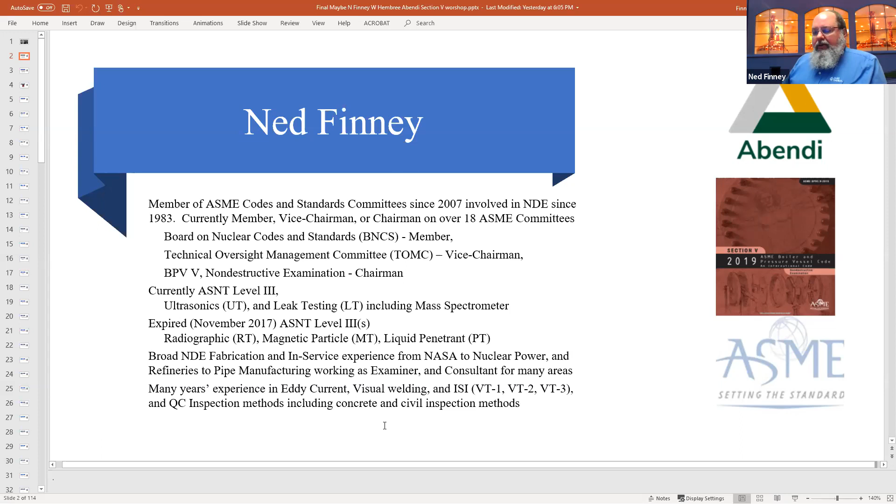Previously certified in eddy current, visual welding, in-service inspection, visual, VT123, and QC inspection methodologies as well. I started my career in concrete, soils, civil testing. And I'll let Wayne go through his resume.

Thank you, Ned. I started out many years ago in 1967, being continuously employed in NDE. I first had a special class put on by the Department of Energy called physical testing, non-destructive and destructive testing at the Union Carbide, at that time Y12 production facility in Oak Ridge, Tennessee. It just happened to be where they had the Manhattan Project. For those people who have read their history, it's where the atomic bomb was manufactured during World War II.

I got out of there, employed by Commercial Test Lab. I spent a little bit of time in the U.S. Army. I was fortunate to parlay my background and work on military aircraft during the Vietnam era. Upon discharge, I worked with a large pipe fabricating outfit in South Carolina for almost a year. Then from there, I went to Combustion Engineering at their nuclear facility in Chattanooga, Tennessee.

I got my first Level 3 by examination then. I took my first ASNT Level 3 in '76 when I transferred to the Construction Services Division of Combustion. And I became the NDE manager for worldwide operations. After 11 years in Connecticut, I got an opportunity to move back to Tennessee, my home state, even though I traveled tremendously, national and international, for Combustion construction services.

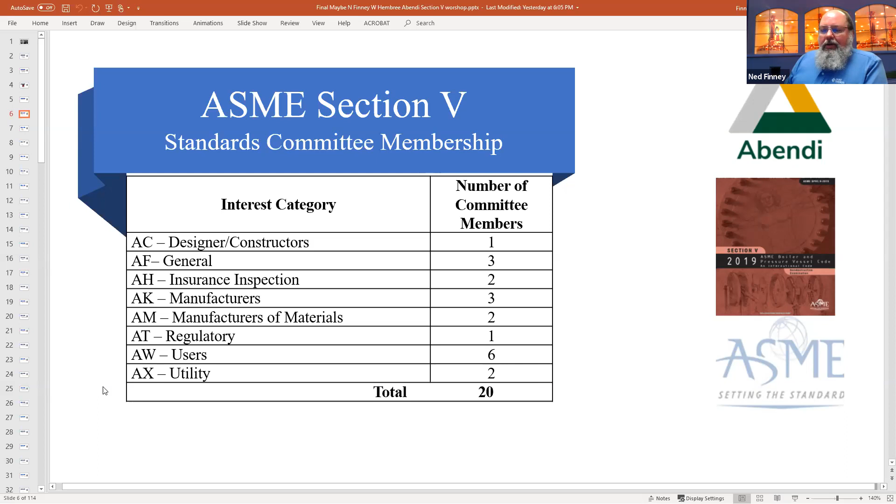And I also note that Wayne and I are also part of that small group of people that have built nuclear power plants, built conventional power plants, been involved in operation of nuclear and conventional power plants, and been involved in other fabrication all the way from building the piping to seeing it installed and having the systems in service. Wayne, if you'd like to talk about the foreword section, I'll turn this over to you. Just tell me when you want to switch through the numbers.

One of the presentations yesterday gave a pretty good history on ASME. It really started in the Industrial Revolution of the entire world, but primarily in the United States. And the first major thing was the sinking of the steamboat, the Sultana, and there's various counts of how many people lost their life. You can do the research on that. The engineers got together in New York City in 1880, and that was really when ASME was started. But the first actual publication was in 1911. The American Society of Mechanical Engineers established the Boiler and Pressure Vessel Committee to formulate the standard rule for construction of steam boilers and other pressure vessels.

Why the steam boilers? Well, at that particular time, there were locomotives. There were steam boilers in factories and schools and just all over the country, and they were not regulated. Matter of fact, from materials and things of that nature, if you had a bolt made in one part of the country, then the nut for that bolt could be made someplace else, and there's no consistency on actual manufacturing. So with that, ASME was formed in 1911.

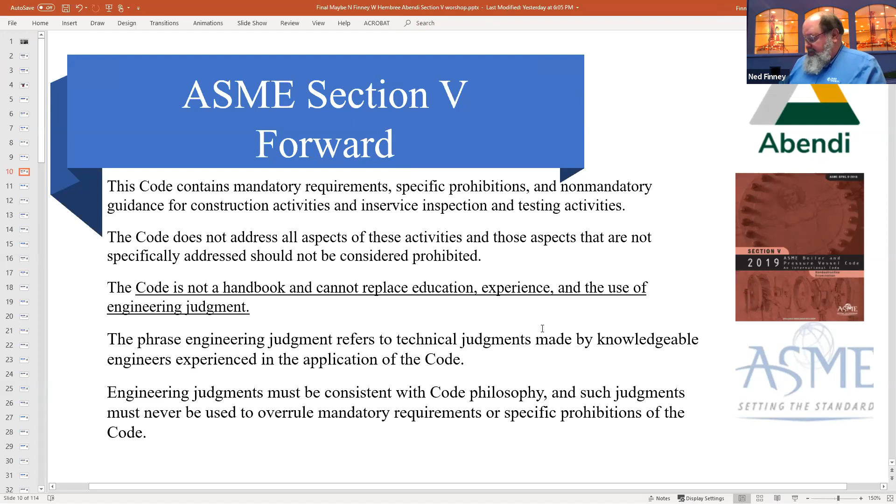Well, if I can get it to advance now, I'll be fine. There we go. Okay, I'll take this. I had one more, didn't realize it.

The committee recognizes that tools and techniques used for design and analysis change as technology progresses, and expects engineers to use good judgment in the application of these tools. The designer is responsible for complying with the code rules and demonstrating compliance with code equations when such equations are mandatory. The code neither requires nor prohibits the use of computers for the design or analysis of components constructed to the requirements of the code. However, designers and engineers using computer programs for design or analysis are cautioned that they are responsible for all technical assumptions inherent in the programs they use and the application of these programs to their design.

Obviously this was added some 15 or 20 years ago, because prior to probably the 1985 to 1988 timeframe, there were not that many computers used in design calculations.

Next slide. I'm there. This is the next slide, Wayne.

The rules established by the committee are not to be interpreted as approving, recommending, or endorsing any proprietary or specific design, or as limiting in any way the manufacturer's freedom to choose any method of design or form of construction that conforms to the code rules. I'll stop here a second. You can see also, I spoke to Section 1, but the same applies for Section 3 and Section 8. There are many weld joint configuration designs listed. The code is not going to tell the certificate holder which one to use. It's up to the certificate holder's design people to determine what's required.

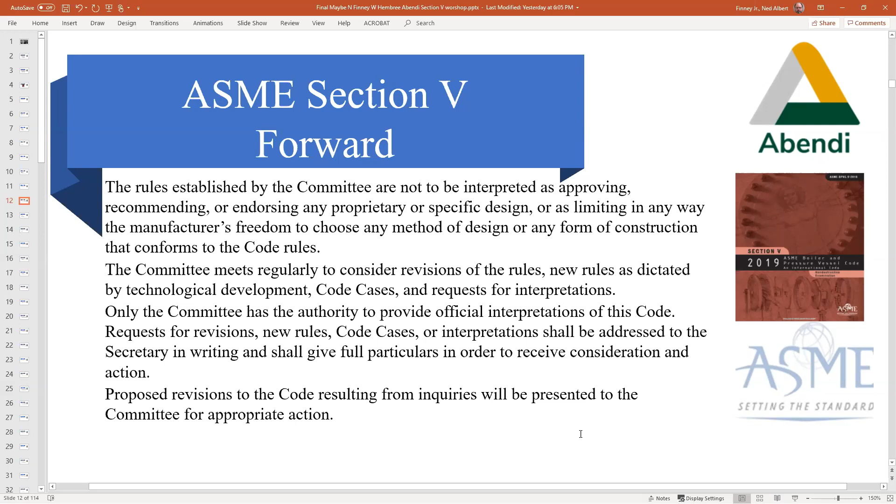I've already read this one. Yeah, I thought, was this the last one we had? Yeah, I'll take over on the next one. Okay, appreciate it. Thank you.

ASME Section 5 is broken up into many different articles, and each article covers different topics. They cover different methodologies for applying non-destructive examination, with separate sections used in different ways. But Article 1 is the general requirements, and general requirements apply to application of NDE across the board. Anything within the book, Article 1 applies to all of it. So there are requirements that apply to radiography, as well as liquid penetrant, as well as acoustic emissions. It covers all of it.

It also goes in and talks about the way that you qualify procedures, personnel, and equipment in order to be able to use it for a given technique within a method. So a method would be radiography, ultrasonics, mag particle, liquid penetrant, leak testing, all of those.

Within radiography, you would have techniques - you have DR, CR, film radiography. Within ultrasonics, you have conventional ultrasonics, time of flight, phased array. Now we've got FMC and other methodologies that we have put in there.

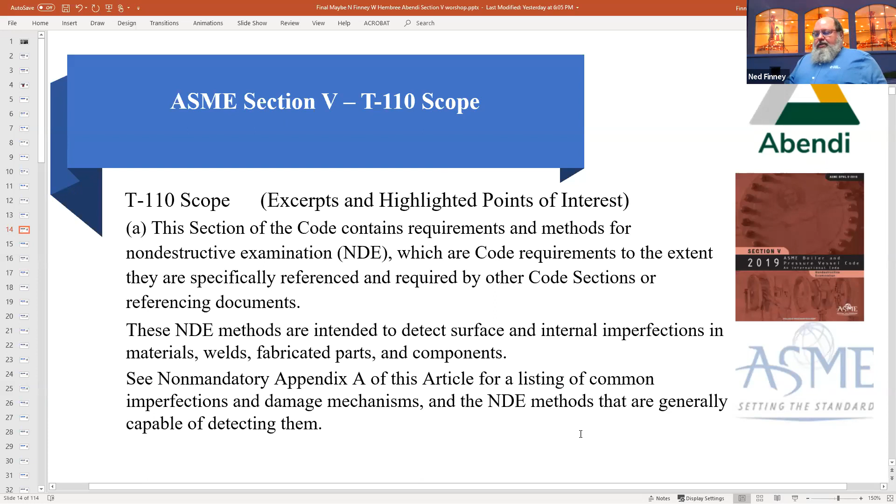So these NDE methods are intended to detect surface and internal imperfections in materials, welds, fabricated parts, and components. Non-mandatory Appendix A is a list of common imperfections and damage mechanisms and the NDE methods that are generally capable of detecting them.

Scope continued. B, general terms. For general terms, refer to mandatory appendix 1. New additions to section 5 may be used beginning with the date of issuance, and they become mandatory 6 months after the date of issuance unless modified by referencing documents.

So what that means is next July, when they publish the 2021 edition, you can start using it. But in January of 22, it becomes a requirement. So don't wait until December of 21 to start looking at the newly published section 5, because the requirements will go into effect unless your referencing documents tell you not to take them into effect.

And in most cases, for section 8 vessels, for most section 1, those sort of things, you will be required to use the new requirements of the published 2021 edition in January of 2022. That's an important change that has been in place for a number of years, but it's not something that people realize until they go, oh my goodness, this is now the rule.

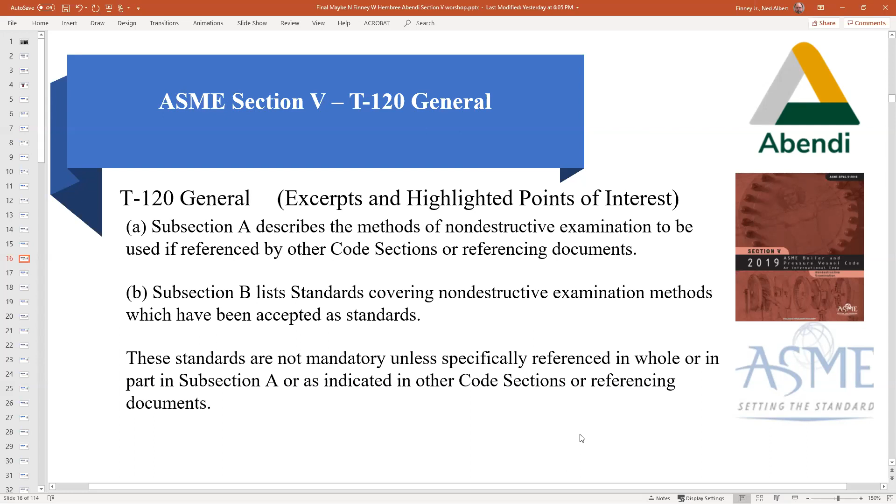Were you going to say something, Wayne? Yeah, I thought you need to go to the next slide. There you go. There we go.

So that was the point I was making on the previous slide. Thank you, Wayne.

Subparagraph E of T120 says, for those documents that directly reference this article for the qualification of NDE personnel, qualification shall be in accordance with the employer's written practice. You must have a written practice for your company, and it shall be in accordance with one of the following documents: SNT-TC-1A,

ASNT CP 189, as amended by mandatory appendix 3 or as amended by mandatory appendix 4. Now,

T120F, which is referenced by several codes, also says that national or international central certification programs, such as the ASNT Central Certification Program or ISO 9712, 2012, and that's important to know that you're compliant with 2012, may be alternatively used to fulfill training, experience, and examination requirements of the documents listed in paragraph E, which is the previous paragraph, TC1A, CP189, as specified in the employer's written practice. You still have to have a written practice, even if you have a central certification program.

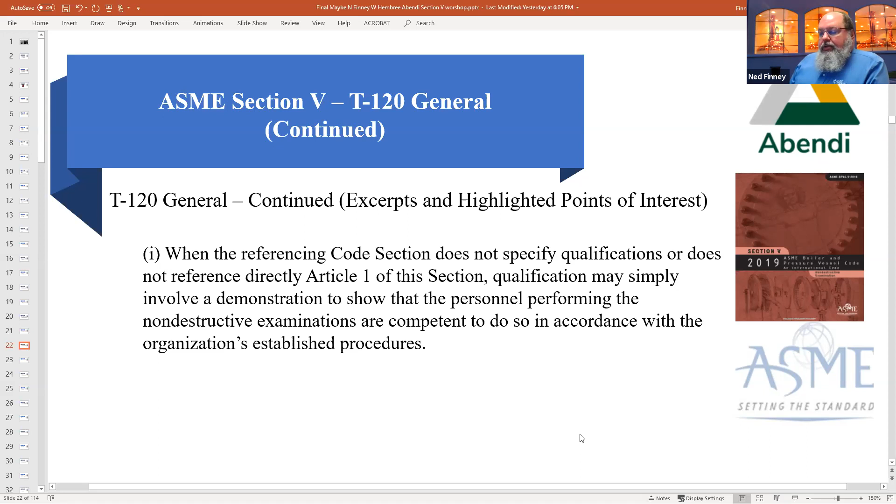When a referencing code section does not specify qualifications or does not reference directly Article 1 of this section, qualifications may simply involve a demonstration to show that personnel performing the non-destructive examination are competent to do so in accordance with the organization's established procedures.

The user of this article is responsible for the qualification and certification of NDE personnel in accordance with the requirements of this article. The organization's quality program shall stipulate how this is to be accomplished. So the company is responsible for the qualification of their NDE personnel. Even if they hire a vendor, the company is still responsible.

I'd like to insert an example. After I retired and started my company, another company hired me to evaluate some radiographic images. They liked my interpretation and knowledge of the code better than the contractor they were using, and wanted me to sign off on acceptance. Unfortunately, I couldn't do that. I had read their written practice, and their written practice indicated that only people who had taken their exam, either full-time or temporary employees, could do so.

Then they realized the shortcoming. The only way I could end up having the final say on the quality of their welds was to take their examination. Which is not a problem—that's not a problem—but it goes to show the reason behind it is that they didn't know if my Level 3 qualification was in the type of work that they were doing or not.

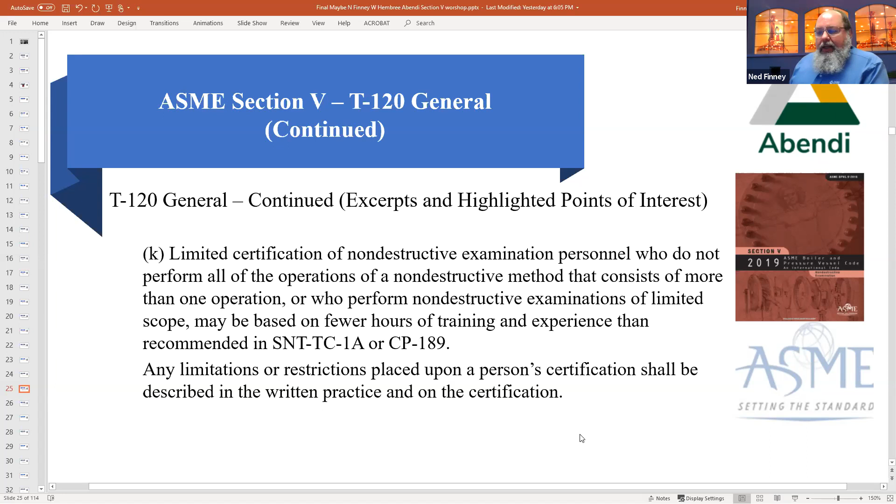T120L is basically saying you can use US customary units or SI metric units for compliance with all these requirements. However, if you use one or the other, you shouldn't mix them, because the conversion between metric and US customary units is not exact—you have to do a lot of work to make them equal. So I work as well in metric as I do in US customary units, but I don't work in both at the same time.

When SI units are selected, US customary values in reference specifications that do not contain SI units shall be converted to SI to at least 3 significant digits—so 0.001 is how far out you need to take your conversion.

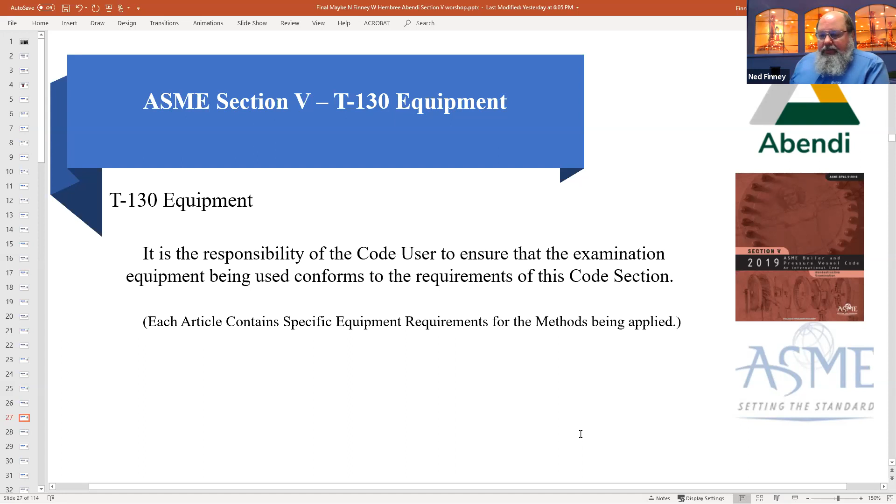That completes T120. There's a lot of information there, and it takes a while to get through it all. T130 is about equipment, and the general requirement is that it's the responsibility of the code user to ensure that examination equipment being used conforms to the requirements of this code section. Each article contains specific equipment requirements for the methods being applied—those last words aren't in the code, but that's what it means.

T150, this is procedure. When required by the referencing code, all non-destructive examination performed under this code section shall be performed following a written procedure. A procedure demonstration shall be performed to the satisfaction of the inspector.

When required by reference code, personnel demonstration may be used to verify ability of the examiner to apply the examination procedure. Examination procedures shall comply with the applicable requirements of this section for the particular examination method. So each of the following articles have requirements of what has to be in the given procedures.

Written procedures shall be made available to the inspector on request, and at least one copy of each procedure shall be readily available to the non-destructive examination personnel for their reference and use. So the inspector gets it on request, but examiners have to have access to one.

Non-destructive examination methods and techniques included in this section are applicable to most geometric configurations and materials encountered in fabrication under normal conditions. So most configurations under normal conditions. However, special configurations or materials require modified methods and techniques.

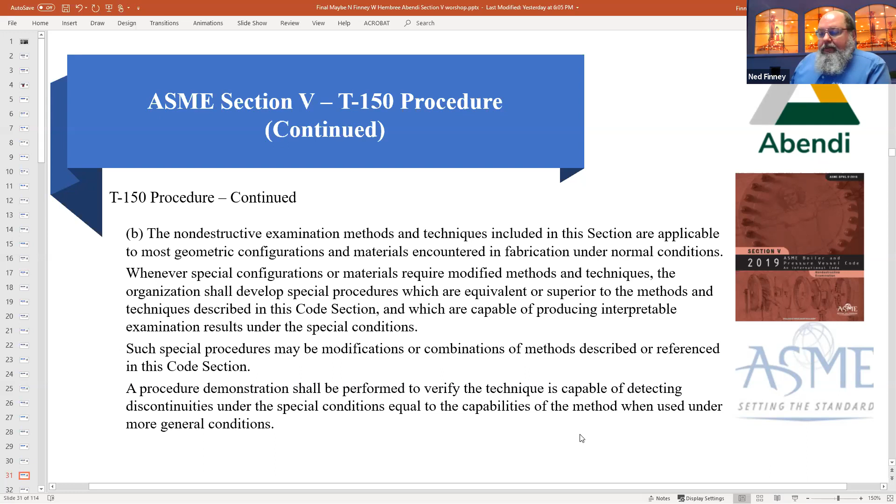Such special procedures may be modifications or combinations of methods described or referenced in this code. A procedure demonstration shall be performed to verify the technique is capable - that may be a repeat of the previous one.

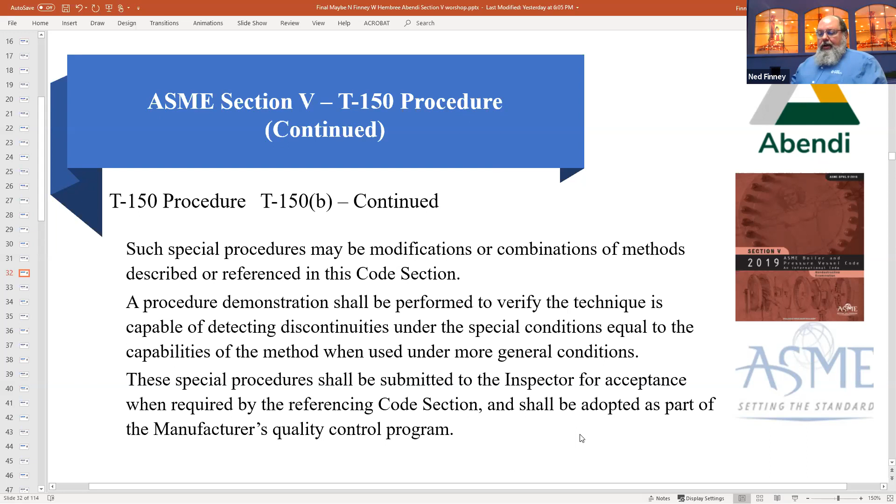These special procedures shall be submitted to the inspector for acceptance when required by the referencing code, and shall be adopted as part of the manufacturer's quality control program.

When a referencing code section requires an examination to be performed in accordance with the requirements of this section, it is the responsibility of the organization to establish non-destructive examination procedures and personnel qualifications and certification procedures conforming to the referenced requirements.

When qualification of a written examination procedure is required by the referencing code section - and you'll notice that a lot of things we say are required by the referencing code section, because Section 5 being a support code, much like Section 2 and Section 9, we are the 'how you do it', and then different codes point to Section 5 depending on their needs.

If I can interject, Ned - an example of this is that for years, the procedure used for radiography, the referencing code accepts the completed radiograph as evidence that the procedure was demonstrated, it was met. That's the end result, and that's the only example within Section 5 where the inspector wants to say, hey, can you achieve the radiographic quality?

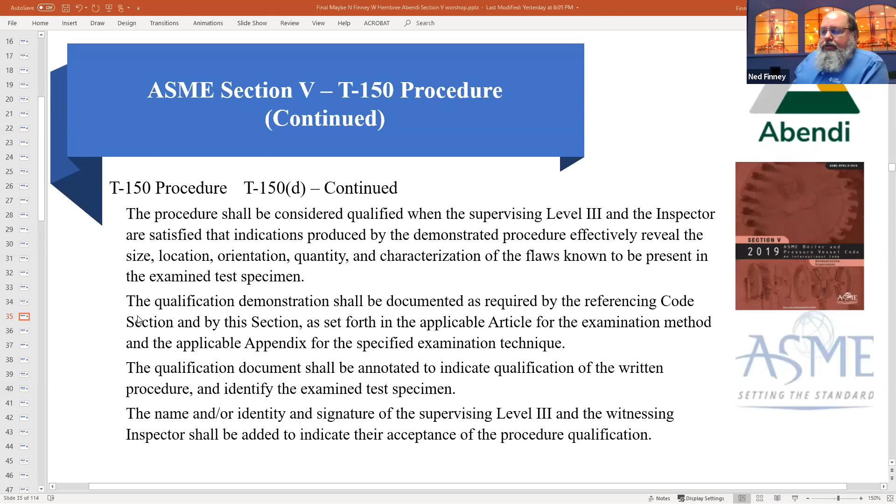Procedure shall be considered qualified when the supervising level 3 and the inspector are satisfied that indications produced by the demonstrated procedure effectively reveal the size, location, orientation, quantity, and characterization of the flaws known to be present in the examined test specimen.

And the qualification demonstration shall be documented as required by the referencing code section and by this section as set forth in the applicable article for the examination method and applicable appendix for the specified examination technique. Qualification documents shall be annotated to indicate qualification of written procedure and identify the examined test specimen.

Name and/or identity and signature of supervising level 3 and the witnessing inspector shall be added to indicate their acceptance of the procedure qualification. That's the end of T150.

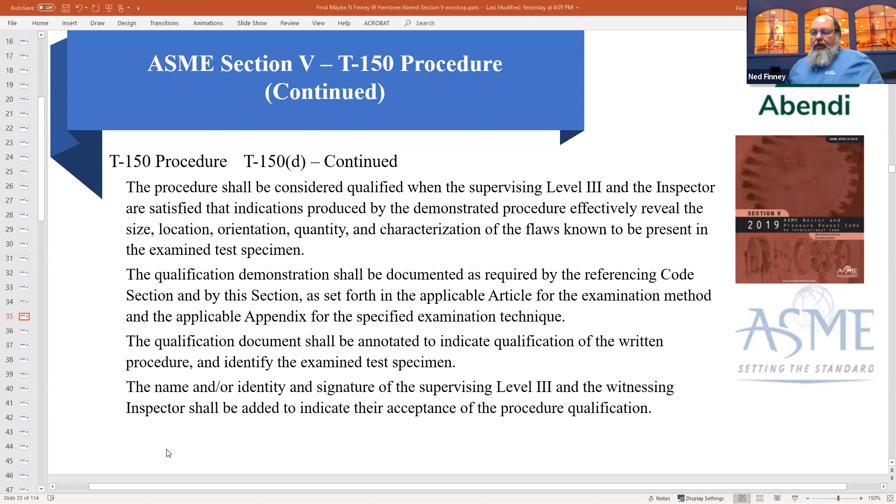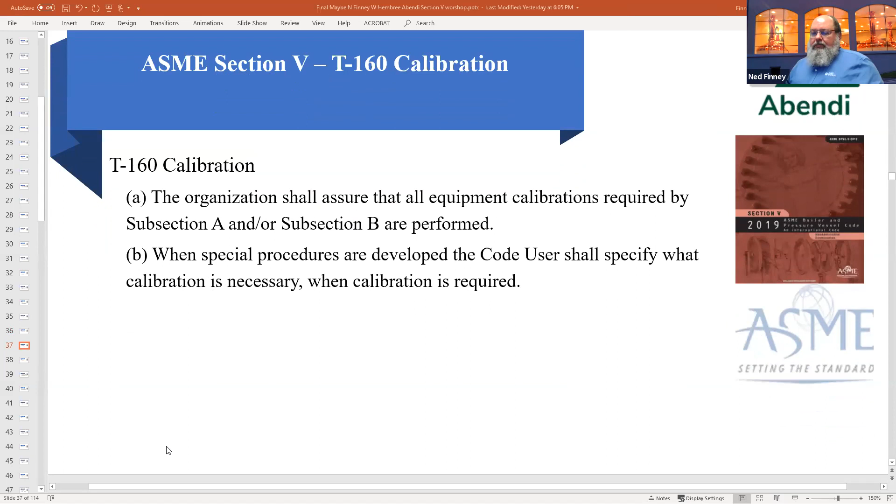After this section, Ned, we ought to take a break. All right. I think I've got the same slide there. So pick back up T170. Yeah. Antonio, 10-minute break. 10 minutes is fine. All right. So we'll be back here at 10:40, people. And you can take the opportunity to write questions to our presenters. And I'm going to get another cup of coffee. Okay. Me too. Indeed. We can resume the presentation. All right.

So T170 is examinations and inspections. The inspector concerned with the fabrication of a vessel or pressure part shall have the duty of verifying to the inspector's satisfaction that all examinations required by the referencing code section have been made to the requirements of this section and the referencing documents. The inspector shall have the right to witness any of these examinations to the extent stated in the referencing documents. Throughout this section of the code, the word inspector shall be as defined and qualified as required by the referencing code section or referencing documents.

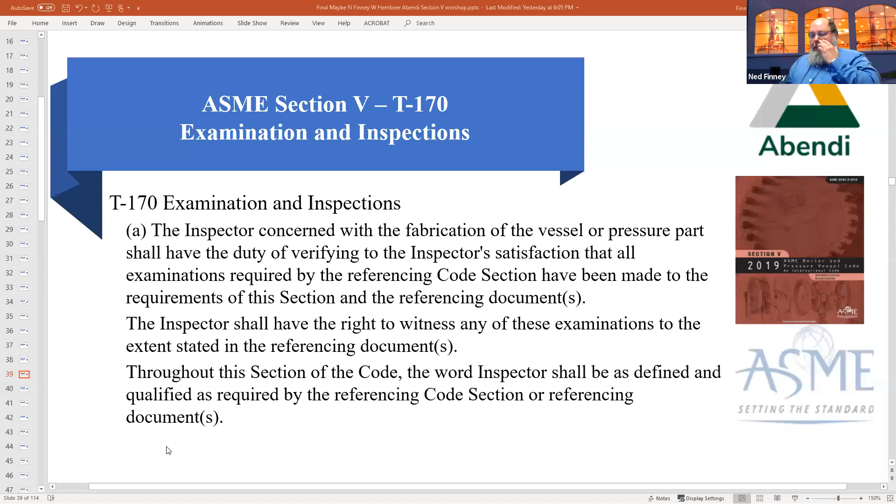And if I can get this thing to work. There. There's a special distinction established in various codes between inspection and examination. And the simple definition that I've always used is inspection is something you watch and examination is something that you perform. Personnel performing them is also adopted in this code. So in other words, the term inspection applies to functions performed by the inspector. The term examination applies to those quality control functions performed by personnel employed by the organization.

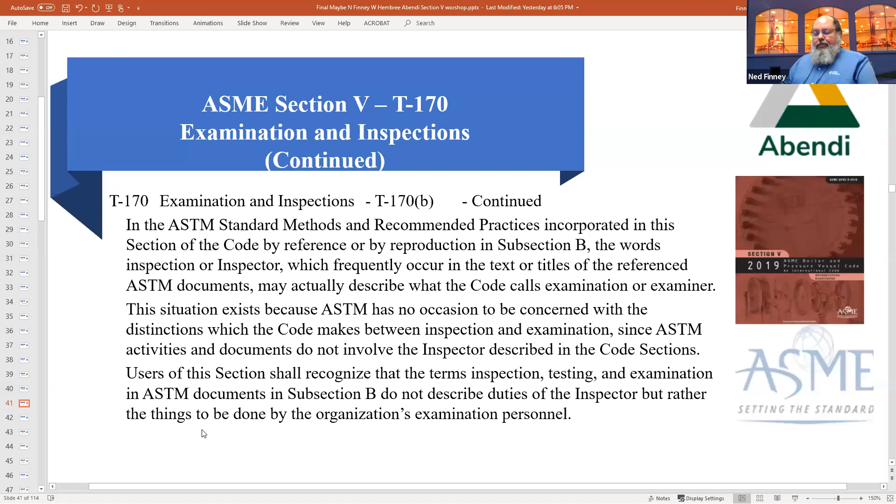One area of occasional deviation in these distinctions exists, and that's in the ASTM standards. The ASTM standards incorporate the word inspection, inspector, and often they're talking about the person who is performing an examination. ASME doesn't modify, for the most part, ASTMs that we publish. They own them. It's their world. So users of this code section shall recognize that the terms inspection, testing, examination in ASTM documents in subsection B do not describe duties of the inspector, but rather things to be done by the organization's examination personnel. Bottom line is the ASTMs use the word inspector to mean examiner in most cases.

If I may add, another way to look at it is the inspector, in many cases in this country, is the authorized inspector. They're the police that make sure that the examiners and the certificate holder follow the code rules. The examiner is one that has responsibility for disposition, accept, reject. The inspector to ASME, the AI or ANII concerning nuclear, authorized nuclear inspector, they do not have that responsibility or authority to accept or reject a weld or component based on quality, if you will. They're only for compliance that the code was met.

So T180 is evaluation. Acceptance criteria for NDE methods in this section shall be as stated in the referencing code section and where provided in the articles of this section. Acceptance criteria in the referencing code shall take precedence. So if we have something that indicates an acceptance criteria in Section V, the referencing code is really the one that applies. These are the acceptance criteria.

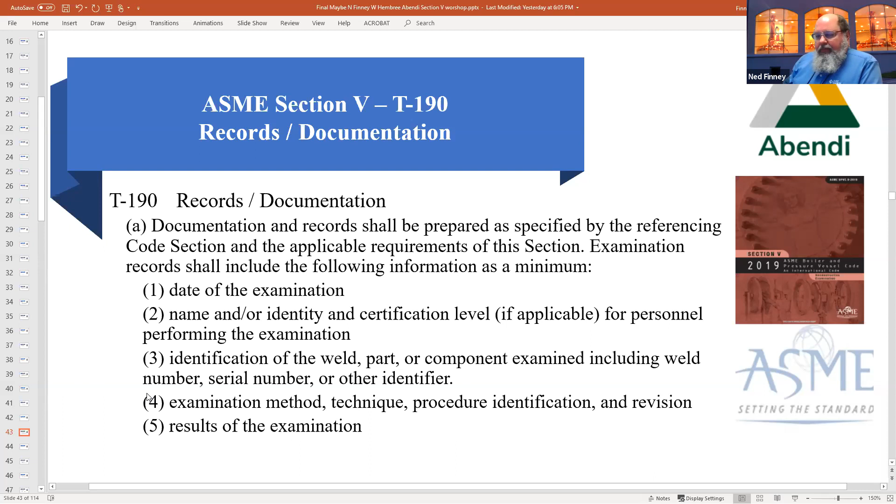Personnel qualification procedure demonstrations performed in compliance with T150A or T150B shall be documented as specified by the referencing codes. When documentation requirements of personnel qualification procedure performance performed in compliance with T150A or T150B are not specified in the referencing code, the following information shall be recorded as a minimum. So even if you're not required to go to T150A or T150B, you still have to say how you qualified your procedure.

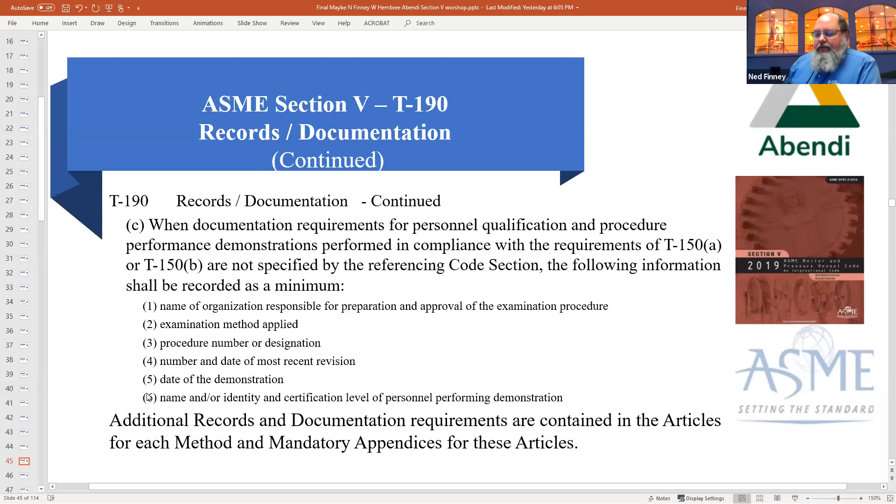Additional records and documentation requirements are contained in the articles for each method and mandatory appendices for the techniques for these articles. Retention of examination records and related documentation, i.e. radiographs or digital radiographs, review forms, ultrasonic scan files, shall be as specified by the referencing code section.

Now, having worked across many industries, I remember having worked for Los Alamos National Labs doing radiography, and you package your film up and you had your really nice report and everything clean and neat, and you turned it over with a transmittal form. And then I went out and did a pipeline job in the desert in New Mexico, and I gave it to the pipeline crew chief that was in charge of the digs and the welds.

And he looked at the report, he pulled it out, he took the film and threw it in the ditch, and they buried it with the weld. And it was kind of one of those days when you went, I worked so hard, and he threw my film in the ditch. All he cared about was the paper report.

So retention of the actual radiographs is really a matter of the owner's rep, the owner's inspector, the referencing code that you are using for your particular examinations. So documentation, we still have to prepare it. We still have to do all the right things for all the required reasons, but retention of radiographs is really up to the referencing code and the owner or the owner's rep. Anything else on that, Wayne?

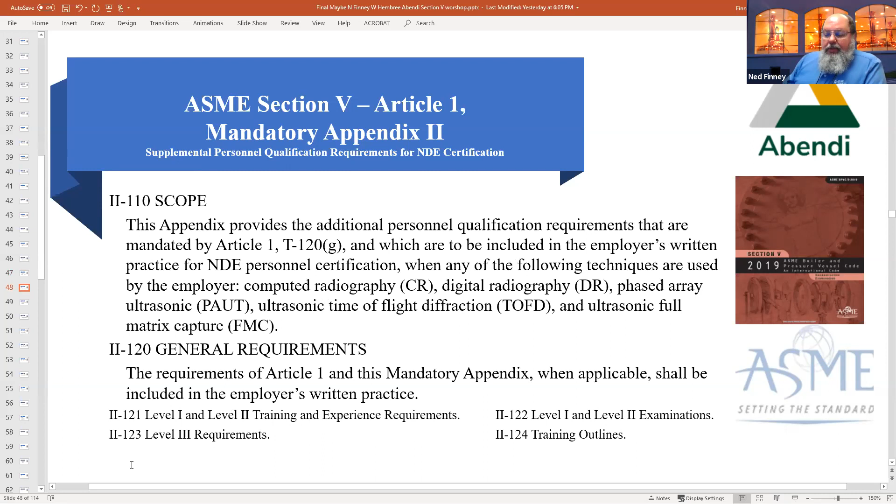Mandatory Appendix 2, we talked about earlier. It is for CR, DR, PAUT, TOFD, and FMC. It contains experience and training requirements, level 3 requirements, examinations, and training outlines for each of those methodologies and techniques.

Mandatory Appendix 3 is the use of the 2016 edition of ASNT SNT-TC-1A. And the major change that we made was the use of the verb should throughout the document to emphasize that it's a recommendation. Section 5 has modified many of these should statements to make them shall statements. And continued satisfactory technical performance shall not be utilized for recertification without a reexamination.

And the Mandatory Appendix 3 as published required you to have a reexamination as specified by your level 3 in your written practice. And that reexamination, we didn't really say what it needed to be. We said it needed to be at the discretion of the level 3, but that you could recertify with continued satisfactory performance provided there was a reexamination.

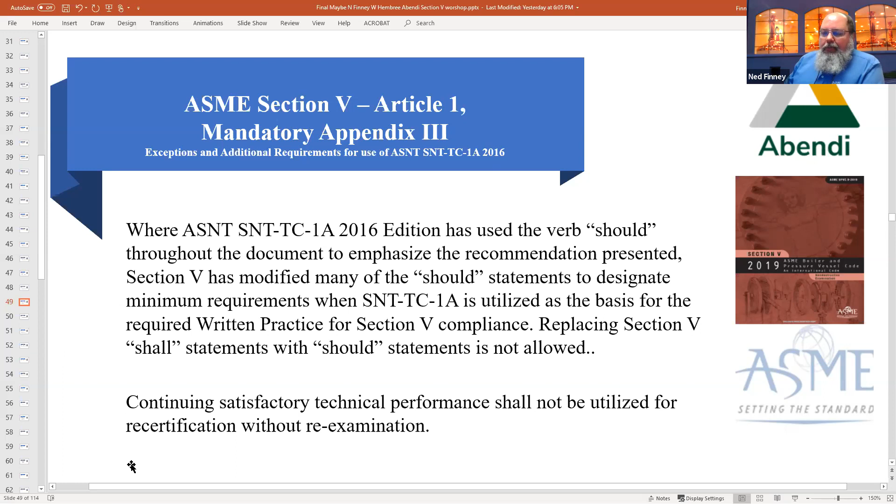And you would be amazed at how many technical inquiries we received when we published that document. As a consequence of that, we have gone through and completely rewritten and will publish a new Mandatory Appendix 3 in July of next year. We'll talk more about Mandatory Appendix 3 later.

Mandatory Appendix 4 is the use of CP-189, qualification and certification of non-destructive examination personnel. It is a standard. It's not a recommended practice. So there's a difference in how it's used. There's a lot fewer exceptions. Requirements identified in this mandatory appendix take exception to those specific requirements identified in the 2016 edition of CP-189. So we added some additional requirements, but not nearly as many as we did for TC-1A because of the difference between a standard and a recommended practice.

Non-mandatory Appendix A.

Wayne, would you like to talk about this? If you can find your mute button. Yes, sir. Thank you.

Again, we had the next 3 slides in one, but we separated it so we could see it. Different service-induced imperfections. And I want to point out this is service-induced. Again, the codes are for new construction, but a lot of standards and possibly other codes do reference Section 5 for methodology. To my knowledge, it's the only complete code out there that includes the depth of methodology, how to perform the NDE. So for example, AWS, American Welding Society, AWWA, American Water Works Association, many other standards do reference Section 5.

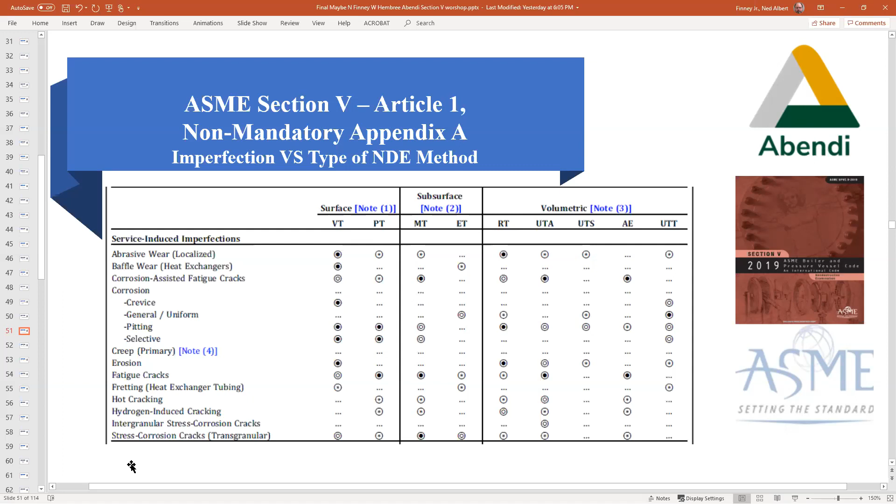So we made a list, and I'm not going to go through all of them. If you go down to the 4th slide, so they can see the key. And it shows at the bottom under VT visual, all or most standard techniques will detect this imperfection under all or most conditions. Up the top right, the single line with the slight dot in it, one or more standard techniques will detect this imperfection or flaw under certain conditions. And then the one directly below that, special techniques, conditions, and/or personnel qualifications are required to detect this.

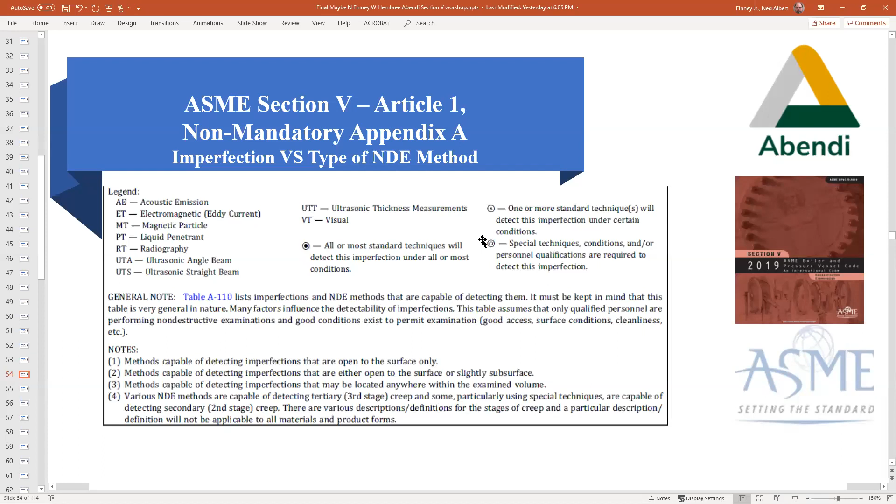So let's go back up to the very first one again. Now we have the legend out of the way. Again, this is directly out of the code, but you can go across the top from surface, VT or PT, and you can see the different types of service-induced imperfections that are identified on the next 3 pages. Subsurface, near surface, mag particle and eddy current, and then volumetric contained within the volume, radiography, ultrasonic angle beam, ultrasonic straight beam, AE acoustic emission, and UT thickness.

This is what we had found for the different types of flaws. And rather than go down and read them for the sake of time, we just wanted to point these out to you so that when you look at this later, you can see, okay, here's creep damage, and there's a note to creep. But you go straight across the surface, you don't really see that much, and you've got a special note that really indicates that.

So we don't have anything identified on that one. But if you go back up to the first one, abrasive wear, you can see that VT, PT, MT, radiography, and ultrasonics all the way across have some degree of finding this abrasive wear.

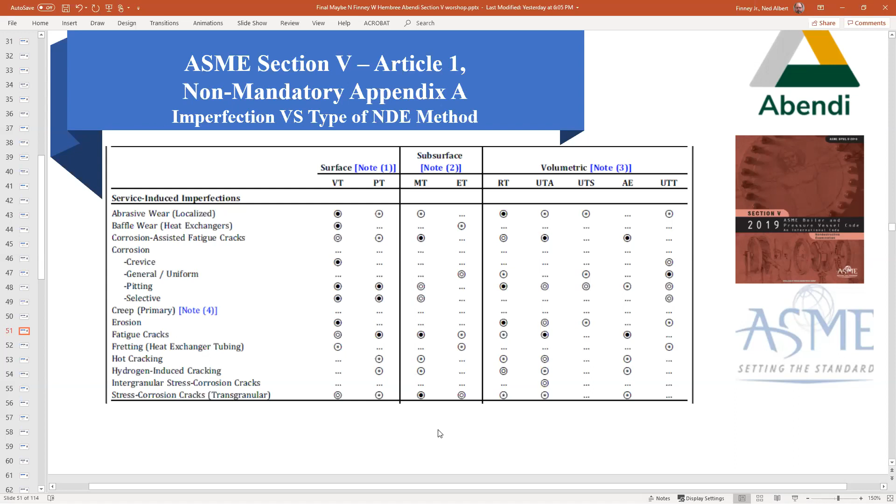Cracks, fatigue cracks, same thing, just all of them but two are indicated. The UT straight beam and the UT thickness especially are not going to find the very fine, tightly adherent fatigue cracks, especially the thickness read, you won't find it.

Let's go to the next slide.

I'll notice that OD undercut associated with welding for power piping indicates that at the toe of the weld, it is determined by mechanical means for acceptance, not just showing up on a radiograph or saying okay, I can identify that off a full V bounce with ultrasonics. It says mechanical means for undercut. But you can see it visually, and yes, you can see it in radiography. But the actual disposition, according to power piping, unless they've changed it recently, but I've worked with it last edition, is to be disposition via mechanical means which measures it.

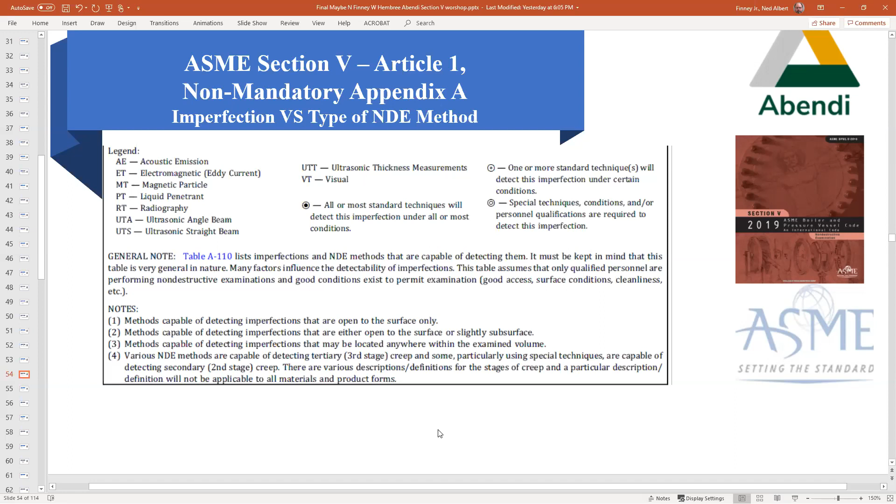I think that covers the 4 slides we had on this fairly quickly. So that completes the review of Section 5, Article 1, which is the general requirement section.

You want to take radiography? You want me to? I have a slide for each of the methods. Okay, I'll take RT and we'll go briefly through that.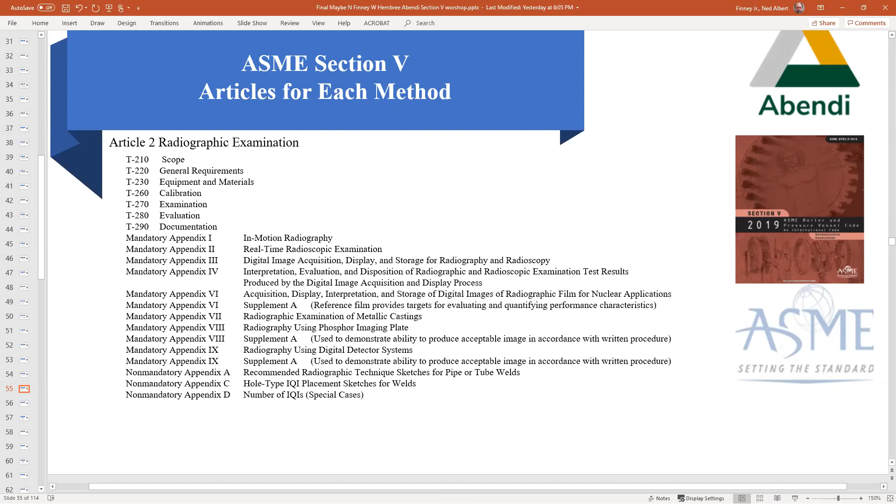Most all the methods show Article 2 appear at the top. Under that, the scope 210 through 290, all of our articles are set up very similar, many of them exact wording. Each one has a scope. For example, Article 2, the 2 denotes Article 2. If you talk ultrasonics, it'd be 410. If you talk visual, I think that's Article 9, that would be 910. So they're all X10, X20, X90, and they're all set up the same way.

Each article has mandatory and non-mandatory appendices. With this one, the mandatory appendix is in motion, and within the scope of the code, within the scope of that article, it will tell you in certain places where you can reference these. For example, I'm going to go down to mandatory appendix 8, radiography using phosphor imaging plates, that's CR, computed radiography. Appendix 9 is radiography using digital detector systems, that is DR, digital radiography.

Then we have a list of non-mandatory appendices. Any place you find the mandatory appendix where an area is not listed, for example exactly the same as 260 for calibration or 270 for examination up at the top, words in that mandatory appendix are in addition to what's in the main article. In other words, that main article will contain valuable information needed in writing the procedure, and the additional information is found in the mandatory appendix.

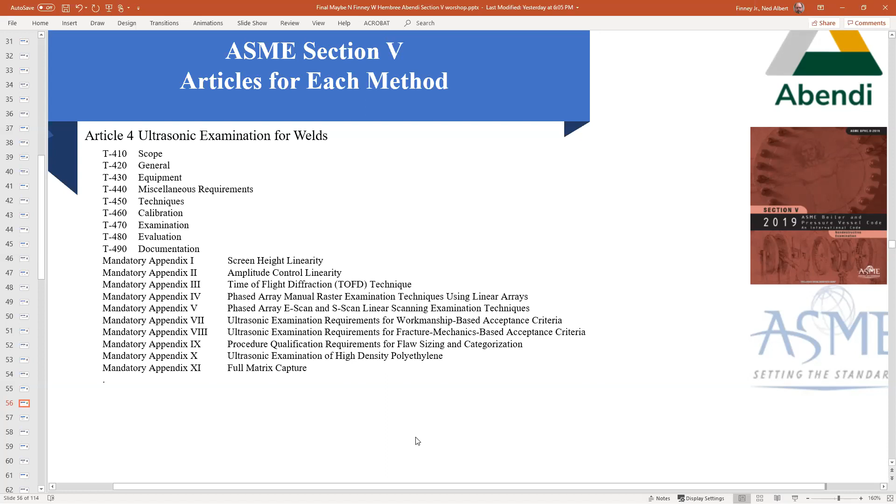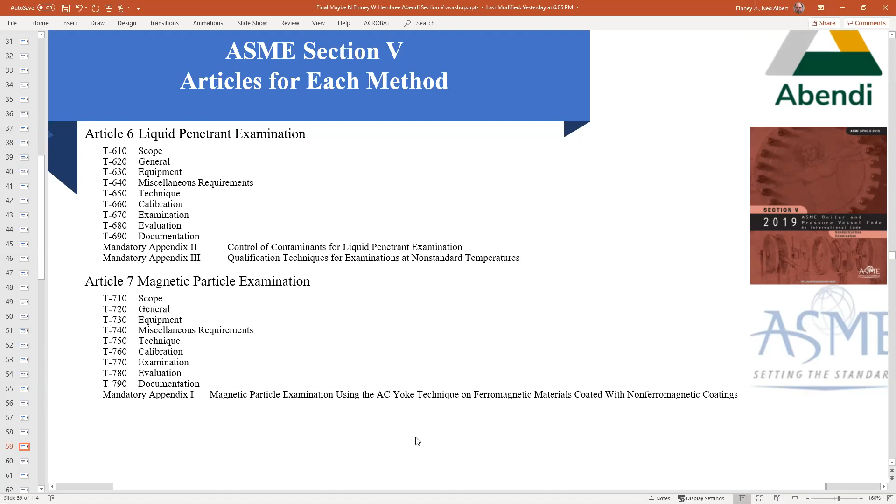There's a lot going on in the code right now for remote visual and even remote inspection, using cameras and heads-up displays, so that inspectors - I'm talking authorized inspectors, owners inspectors, and such - can have somebody with a camera on their head go look at something for them. The Technical Oversight Management Committee has a Strategic Initiatives Committee, which I chair, and they have a task group looking at remote inspection and examination technology. So we're constantly improving and trying to improve the applications within the ASME code.

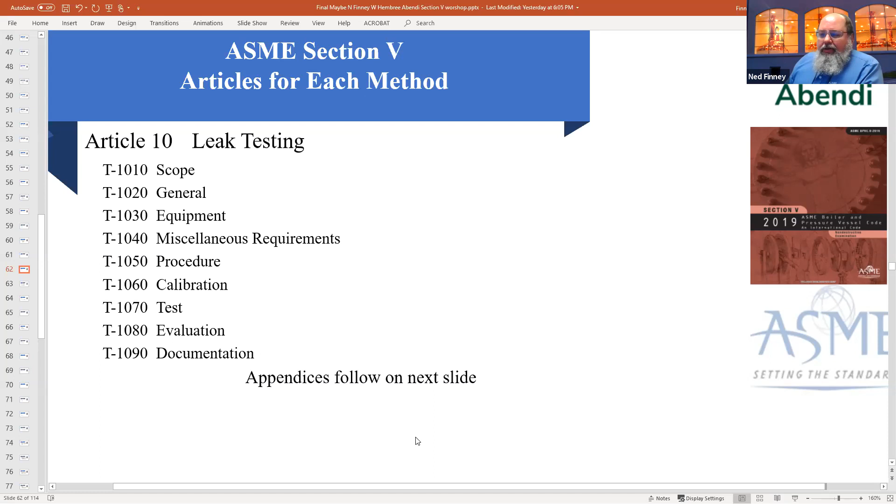Article 10, leak testing, one of my certifications, and there's a lot to leak testing. The appendices are on the next slide, and they cover all the different methodologies.

So bubble testing, vacuum box, halogen diode, mass spectrometer, and a couple of methodologies: pressure change, thermal conductivity, hood technique, mass spec, ultrasonic leak detection, helium mass spectrometer, helium filled, another method of mass spectrometer, and then supplementary leak testing equation symbols. There's a lot of information involved in leak testing.

And we've been doing a lot of work lately in improving and getting the leak testing standards back to where they need to be and catching up with our technology.

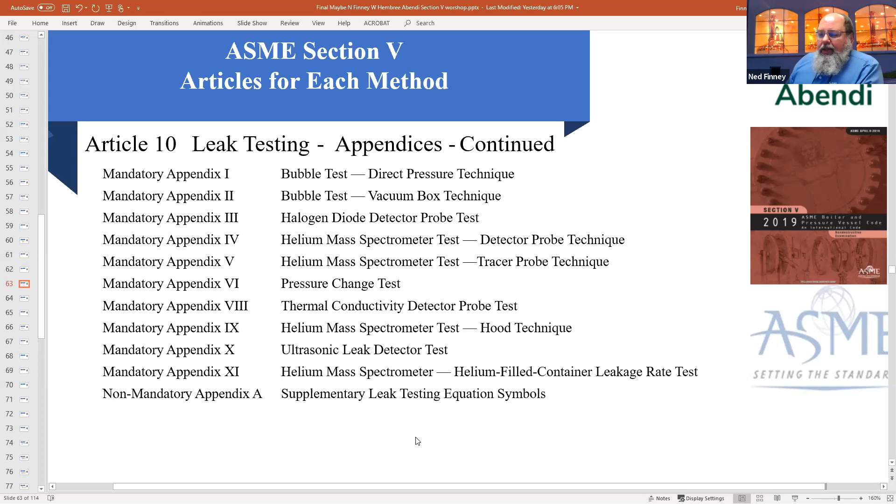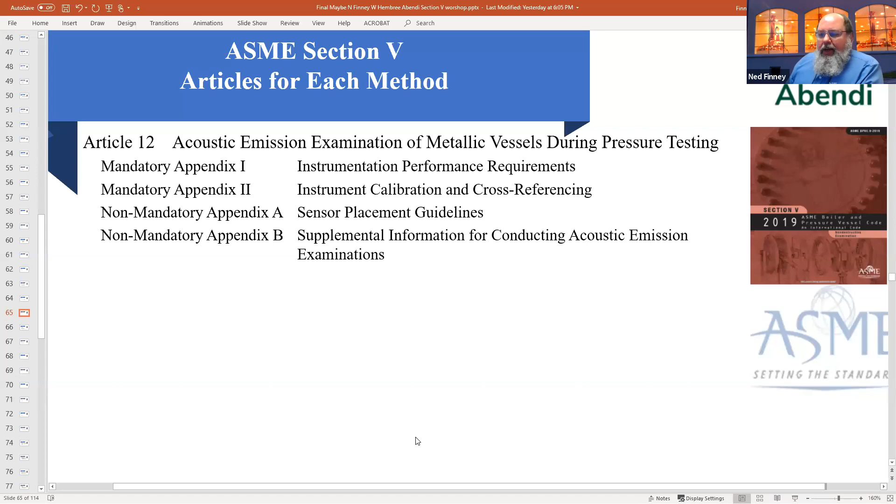Article 12 is acoustic emissions on metallic vessels during pressure testing. So you can put your acoustic emissions sensors on when you're doing your pressure testing and apply them in accordance with this article of Section 5.

Ultrasonics was applied inconsistently. The people that were trained and qualified in ultrasonics early on, a lot of times they hadn't been properly trained. They weren't properly experienced, and they were out there performing the exams, and they didn't know what they didn't know. And we've seen the same thing over the years with phased array when it first rolled out. We had people performing phased array that weren't fully trained and weren't really up to speed and knowledgeable in all of the things that they needed to be.

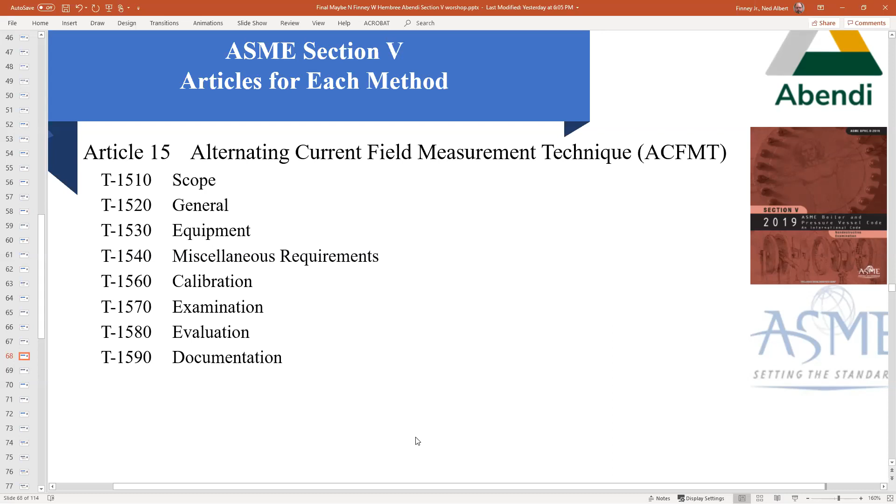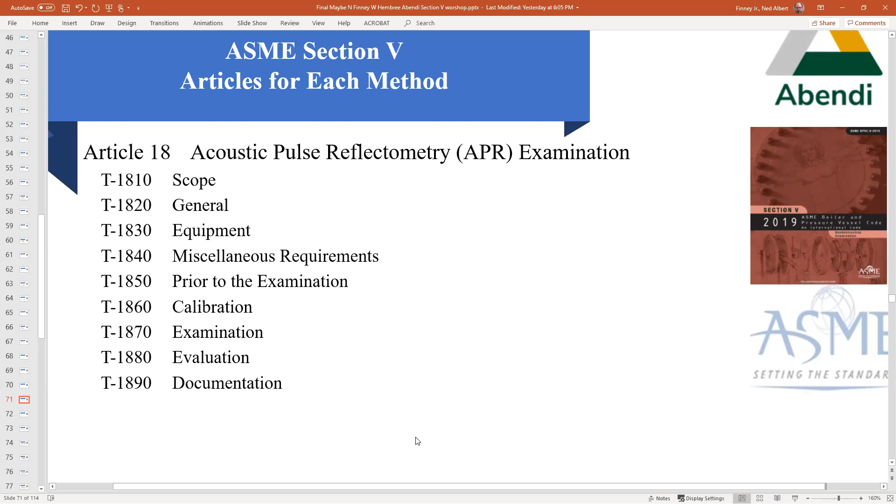Article 19 is guided wave examination method for piping. This is more recent. And we actually had a working group on guided wave when this was being developed. And now we have rolled those people back under the ultrasonics working group. So working group ultrasonics is now in charge of guided wave ultrasonics. This is around 2015, just about 5-6 years ago.

And that's the end of our currently published articles. It is interesting to note we have Article 20 and Article 21 that will be in the coming 2021 edition, and then I'll have a slide on them later.

So now it gets back into more of the particulars. Article 14 is examination system qualification. And the provisions of this article are to be used when qualifying NDE systems, mandatory when specifically invoked by the referencing code section. It's interesting to note that B31Q says that you will qualify your procedures using Article 14. Also in Section 11, Appendix 8, their program references Article 14.

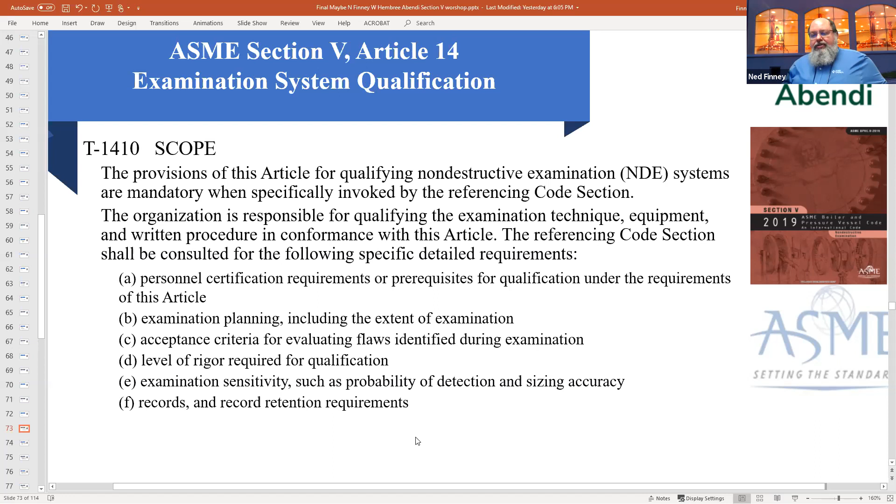in what your probability of detection is. The examination sensitivity, the probability of detection, the sizing accuracy, the records that are to be done for qualification, and the retention of the records are all things that have to be specified by the referencing code or the referencing documents.

The qualification process set forth in this article involves evaluation of general, technical, and performance-based evidence presented within a documented technical justification, and when required, blind or non-blind performance demonstration. Technical justification is a written report providing detailed explanation of the written procedure, the underlying theory of the examination method, and any laboratory experiments or field examinations that support the capability of the examination methods.

I did a procedure qualification for the mixed oxide waste project back in, probably about 2010. We went out and selected field produced welds, developed a scanning process and everything we needed to inspect these, and found flaws in these field produced welds. Then we did metallography, sectioned them, and determined what we had found. Was it accurate? Were our sizing methodologies accurate? This was 4 millimeter thick

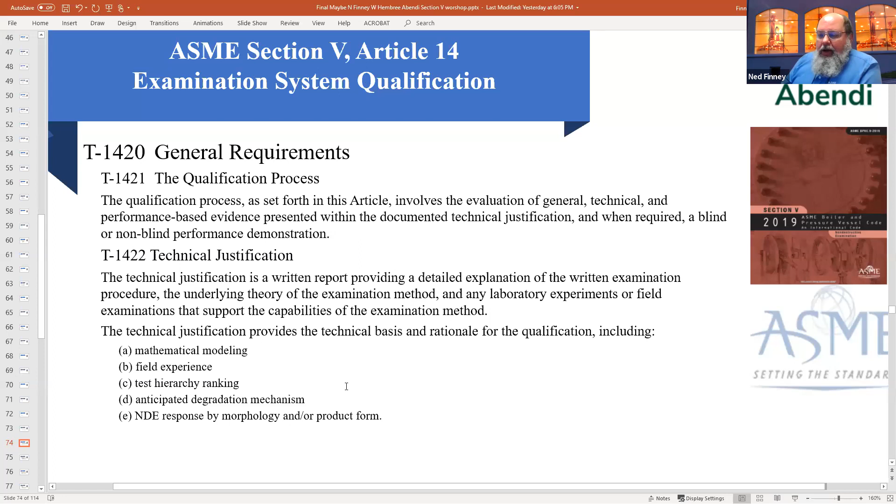General requirements: performance demonstration establishes the ability of a specific examination system to achieve satisfactory probability of detection.

Currently, Article 14 is going through a major revision. The analytics are being looked at to expand the level of confidence and the probability of detection numbers, because currently it's only 90% probability of detection with a 90% level of confidence, 95%, and 99. So we really only have 3 levels of each of those, and currently there are 3 levels of rigor involved in Article 14. We want to expand that as well. So there's a major rewrite going on for Article 14 right now.

Levels of rigor: more rigorous procedure qualification can be beneficial for the following reasons. You have an improved pass-fail rate. A more robust procedure is easier for personnel to apply and get the right results. You have reduced scope of blind personnel qualifications, better understanding of correlation between the procedure and the damage mechanisms of interest, and more reliable written procedures.

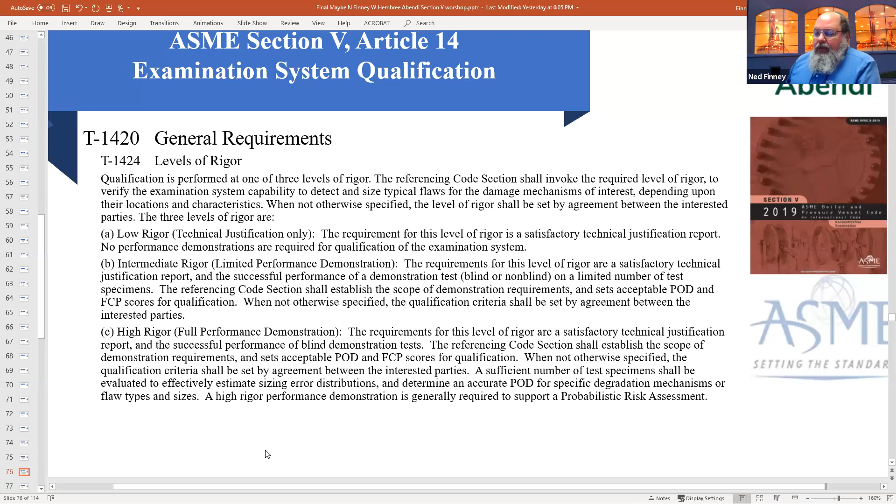Examination and performance demonstration shall be conducted in accordance with written procedure, using the techniques and equipment described in the tech justification. Supplemental information for conducting various modes of performance demonstrations is provided in the following paragraphs.

Intermediate rigor: the objective of intermediate rigor performance demonstration is to reveal inadequate procedures or examiners. This is the go or no-go type. You write the procedure, you write the justification, you go out and perform exams, and you pass or you fail.

High rigor: the following guidelines describe methodology for constructing POD performance demonstration tests for examination system qualification. In order to construct any of the detection tests mentioned in the appendix, the following information must be assembled: type of materials, type of flaws the procedure is supposed to detect, the size of the critical flaw for this application, minimum acceptable probability of detection, critical flaws, the maximum acceptable false calls probability, and the level of confidence that the test is supposed to provide.

Table T-1472.1 has level of confidence, the number of missed flaws, and the probability of detection. It doesn't have false call information, that's a separate function. But if you want a 90% level of confidence with a 90% probability of detection, you can have zero missed flaws, and you have to have at least 22 flaws in your sample set.

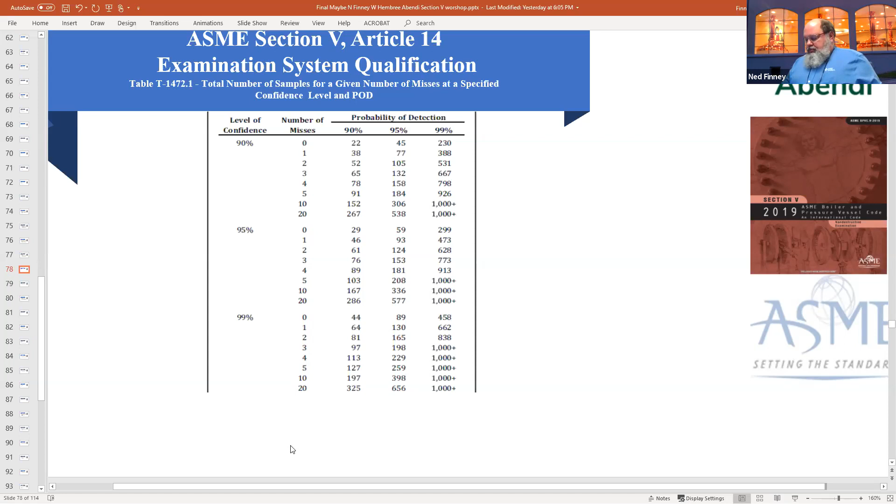So Wayne, if you want to take over the follow-the-code rules section.

Okay, thanks Ned. Wayne, I'm sorry. May I suggest another 10-minute break for another mug of coffee? That sounds good, we'll have a 10-minute break and then resume on this slide. It's 11:40, we have 10 minutes break, everybody back, and you can take the time to write your questions to our presenters.

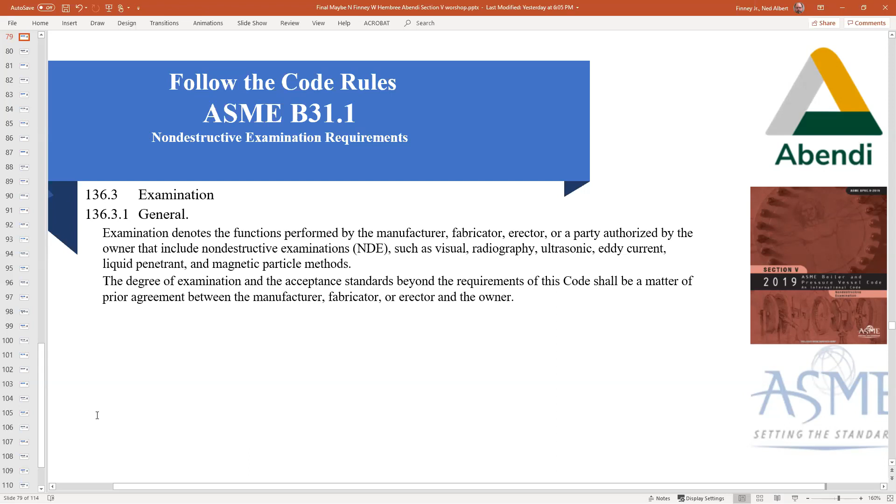I briefly spoke of this earlier, that I've seen several cases in this country where the certificate holder, the fabricator, was unaware of what the contract said. The contract indicated that the owner had final disposition responsibilities. You need to watch that. The contract is a legal situation that has to be worked out by the courts, and that has presented a lot of heartache and headache for manufacturers in this country.

Next slide. Okay, qualification of NDE personnel. Personnel performing the NDE of welds shall be qualified and certified for each examination method in accordance with the program established by the employer of the personnel being certified, which shall be based on the following minimum requirements:

instruction in the fundamentals of the non-destructive examination method; on-the-job training to familiarize the NDE personnel with the appearance and interpretation of indications of weld defects. The length of time for such training shall be sufficient to ensure adequate assimilation of the knowledge required. A visual acuity examination performed at least once each year to determine the optical capability of the NDE personnel to perform the required examination.

This is a real important, real key. Upon completion of A and B, Alpha and Bravo above, the NDE personnel shall be given a written examination and performance examination by the employer to determine if the NDE personnel are qualified to perform the required examination and interpretation of the examination results.

As a certificate holder, if you're a manufacturer and you have in-house people, well, you're controlling everything. If you're a certificate holder and you contract outside NDE personnel, then it's your responsibility from an audit standpoint to make sure that their written program conforms with everything that we just discussed here. Next slide.

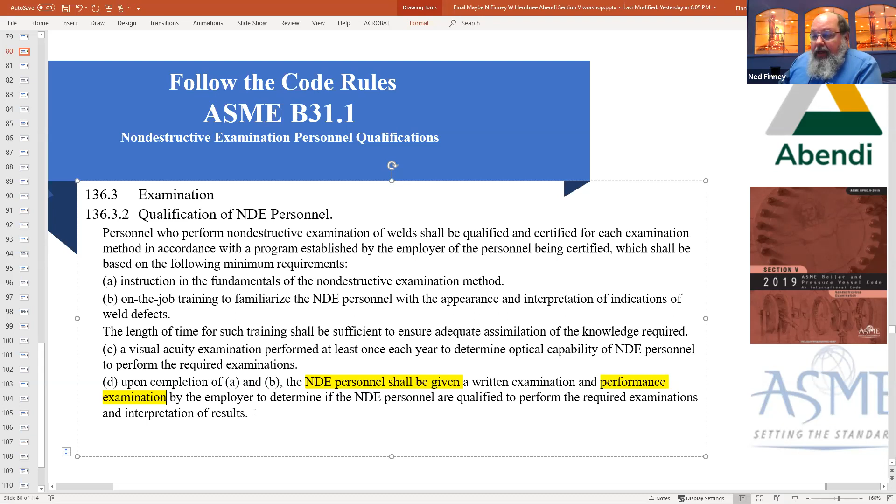Wayne, I wanted to make a point here. This does not say that only level 1 and level 2 personnel have to be given written examination and performance examinations. It says NDE personnel. So that would include your level 3s. They have to be given a performance examination. And I think that's an important point that we brought out in our mandatory appendix 3. Correct. Good point.

Next slide, 136.3.2, qualification of NDE personnel. Echo, certified NDE personnel whose work has not included performance of a specific examination method for a period of 1 year or more shall be recertified by successfully completing the examination of D, Delta, and also passing a visual examination of C, Charlie. Substantial changes in procedures or equipment shall require recertification of the NDE personnel.

In our articles, we have what's considered essential variables and non-essential variables. If you have a change in the essential variables of that particular method, then that's also going to require re-qualification, recertification. It says for this code, the requirements of ASME BPVC Section 5, Article 1, Mandatory Appendix 3, are optional.

And the B31s are the only ones that say it's optional. From the other codes, this is mandated, to the best of my knowledge. Again, if in question, I would check the code that you're working to. This is from the 2020 edition of B31.1.

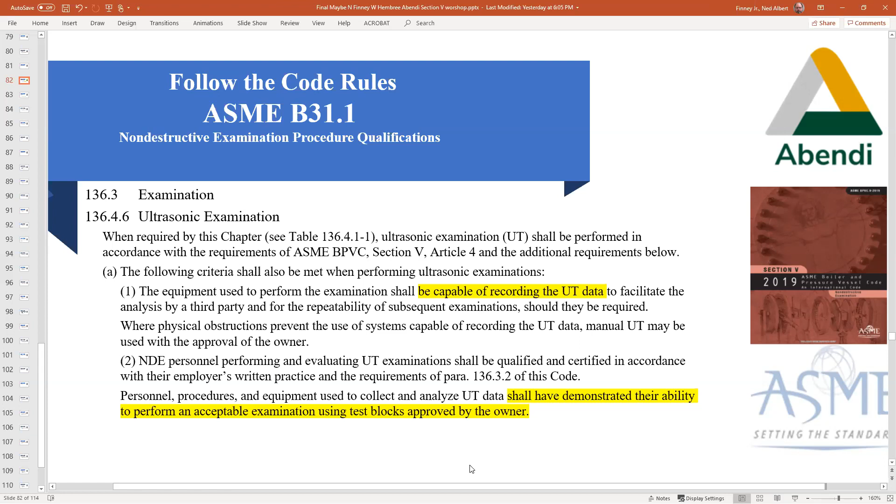Next slide. 136.4.1, non-destructive examination. The NDE shall be performed in accordance with the requirements of this chapter. The types and extent of mandatory examination for pressure welds and welds to pressure retaining components are specified in another table, Table 136.4.1-1. For welds other than those covered under the table, as previously mentioned, 136.4.1-1, only visual examination is required.

Welds requiring non-destructive examination shall comply with the applicable acceptance standards for indications as specified in a couple of paragraphs, 136.4.2 and 136.4.6. As a guide, the detection capabilities for the examination methods are shown in another table. That's 136.4.1-2. Welds not requiring examination, i.e. RT, UT, MT, and PT by this code, or the engineering design shall be judged acceptable if they meet the examination requirements of 136.2 and the pressure test requirements specified in paragraph 137.

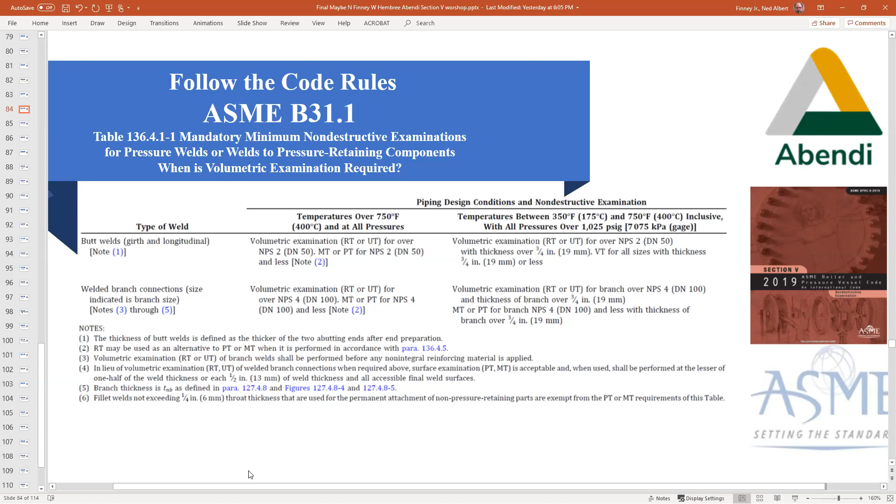So you got RT may be used as an alternate to PT or MT when it's performed in accordance with this paragraph 1. And again, there's a difference between paragraph and table. In accordance with paragraph 136.4.5. And of course, the same thing goes with the different temperature range to the right. Next slide.

General notes under 136.4.1-1. All welds shall be given a visual examination in addition to the type of specific non-destructive examination specified. Bravo, NPS, nominal pipe size, DN, diameter nominal, RT, and it gives you definitions here, radiography, and the other NDE methods. I'm not going to read through them all. Delta, D, for non-destructive examinations of the pressure retaining component, refer to the standards listed in Table 126.1-1 or manufacturing specifications.

E, Echo. Acceptance standards for non-destructive examinations performed are as follows. And it lists them. Magnetic particle, see a certain paragraph. It's 136.4.3, etc. In volumetric, radiography and ultrasonics, you can see radiography is 136.4.5 and ultrasonics is one more paragraph, 136.4.6.

F, Foxtrot. All longitudinal welds and spiral welds in pipe intended for sustained operation in the creep range, see paragraphs 104.1.1 and 123.4 and Table 102.4.7-1, must receive and pass 100% volumetric examination. And they're again indicating RT or UT per the applicable material specification or in accordance with paragraph 136.4.5 or 136.4.6, which happens to be the RT or the UT acceptance criteria.

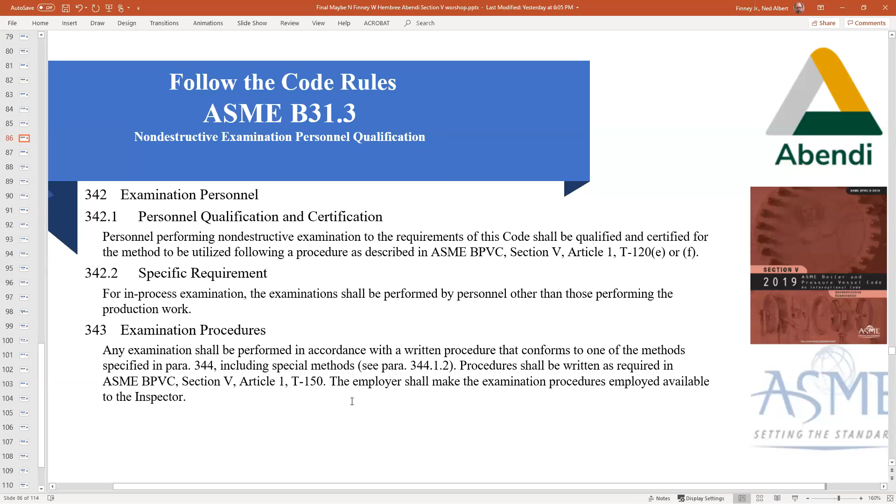343, examination procedures. Any examination shall be performed in accordance with a written procedure that conforms to one of the following methods specified in paragraph 344, including special methods. Reference to paragraph 344.1.2. Procedures shall be written as required in, again, we go back to Article 1. That's one of the reasons we spent so much time on Article 1 this morning. It contains valuable information. And I don't know if we've mentioned it already or not, but each of the articles, Article 2, Article 3, etc., say when this article is invoked, together with it you get Article 1. So you can read that in the scope of each of the articles.

343, examination procedures. Any examination shall be performed in accordance with a written procedure that conforms to one of the methods specified in paragraph 344. Again, includes special methods. Procedures shall be written as required. Again, Section 5, Article 1, T150.

The employer shall make the examination procedures employed available to the inspector. Again, if this is the owner's inspector, then he's reviewing the procedures. B31 does not have an AI like the other BPV codes do. So that guy is doing an audit performance, if you will, and the procedure must be made available to them.

Types of examinations, 344 and 344.1 general, and then point 1 methods. Except as provided in 344.1.2, any examination required by this code, by the engineering design, or by the inspector shall be performed in accordance with one of the methods specified herein.

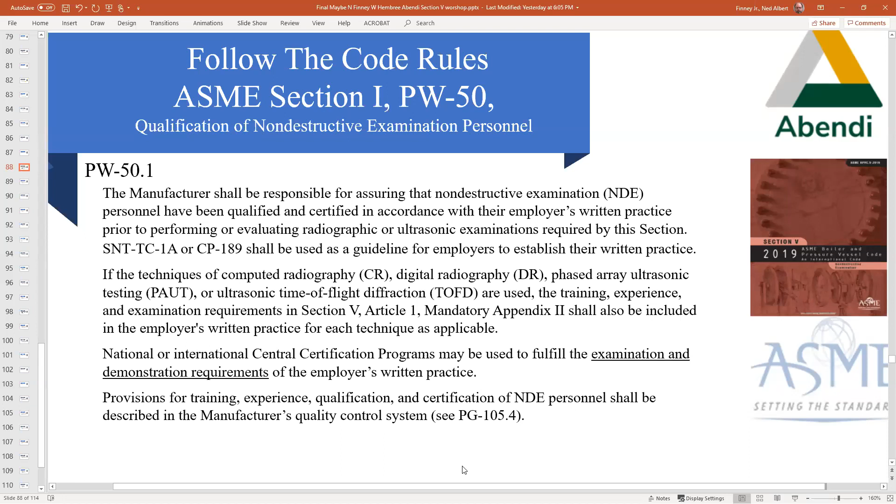National and international certification programs may be used to fulfill the examination and demonstration requirements of the employer's written practice. Provisions for training, experience, qualification, and certification of NDE personnel shall be described in the manufacturer's quality control system, see PG of Section 1, paragraph 105.4. Next slide.

PW 50.2, NDE personnel should be qualified by examination. Qualification of NDE Level 3 personnel certified prior to the 2004 edition of Section 1 may be based on demonstrated ability, achievement, education, and experience. Such qualifications shall be specifically addressed in the written practice. If the NDE Level 3 personnel are certified in either RT or UT methods and use the techniques of computed radiography, CR or DR, or PAUT or TOFD, then prior to their next recertification period, the requirement of Section 5, Article 1, Mandatory Appendix 2 for the Level 3 personnel shall be met.

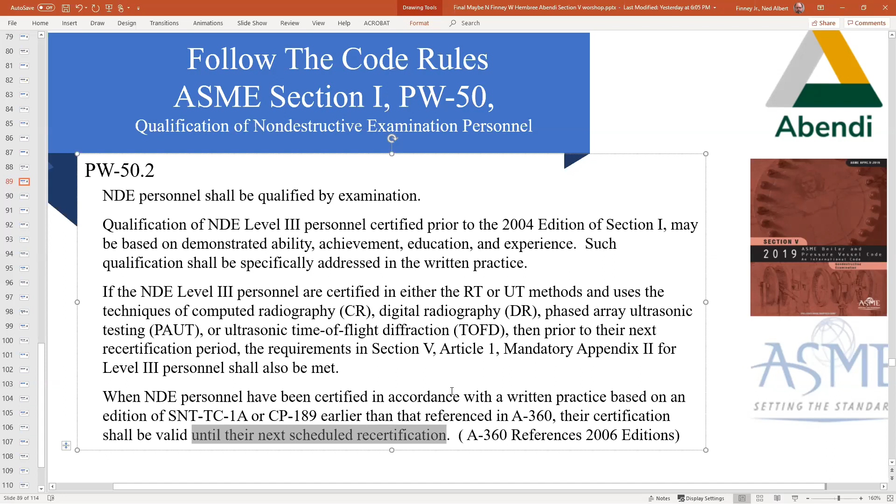In essence, what that says is that it's now come out in the code, and if they were trained, qualified, and certified to an earlier edition, upon expiration they must meet Article 1, Mandatory Appendix 2. When NDE personnel have been certified in accordance with the written practice based on an edition of TC-1A or CP-189 earlier than that referenced at A-360, their certification shall be valid until their next scheduled recertification. And A-360 references the 2006 edition.

So that means that you're now working to a later code. You do not have to stop that individual that's in the middle of a 3 or 5 year certification, 3 for Level 2 and 5 years for Level 3, and now recertify him. You can wait until their expiration comes up and then certify them in addition to the previous information, but they've got to be included under Section 5, Article 1, Mandatory Appendix 2.

PW 50.3: recertification shall be in accordance with the employer's written practice based on the edition of TC1A or CP189 as referenced in A360. Recertification may be based on evidence of continued satisfactory performance, or by re-examination or examinations, indicating one or more as deemed necessary by the employer. In addition, if the techniques of CR, DR, PAUT, or TOFD are used, the training, experience, and examination requirements in Section 5, Article 1, Mandatory Appendix 2 shall be met by the NDE personnel prior to recertification.

Okay, again, we're in Section 1. PW 11 of Section 1, the first paragraph states, welded butt joints requiring volumetric examination are specified in Table PW 11. Now let me say here, probably up until about 20 years ago it used to require radiography, but then they combined it and said volumetric, which means either or. I'll come back with a little discussion about that and MT and PT as surface exams in a second. Unless PW 11 restricts volumetric examination to one method, either the radiographic or the ultrasonic method may be used. You can do either one of them if it's required a volumetric exam.

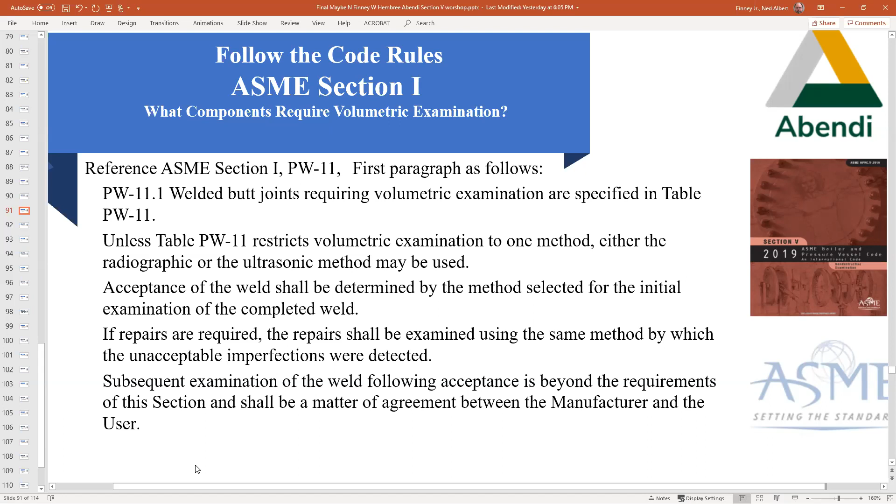Acceptance of the weld shall be determined by the method selected for the initial examination of the completed weld. So in other words, you do radiography on it, you don't like the results, you can't go back and do ultrasonics on it—you use the acceptance criteria of the method that was used. If repairs are required, the repairs shall be examined using the same method by which the unacceptable imperfections were detected. Again, if radiography was used to deem that welding flaw unacceptable, therefore rejectable, and a repair was made, then you come back and use the same method, radiography. Subsequent examinations of the weld following acceptance are beyond the requirements of this section and shall be a matter of agreement between the manufacturer and the user.

That's the first paragraph. The next slide is the second paragraph. This was added almost 30 years ago, I think it was 1991 or 1992. It states: experience has demonstrated that welded butt joints not requiring volumetric examination by these rules have given safe and reliable service, even if they contain imperfections that may be disclosed upon further examination. Any examination and acceptance standards beyond the requirements of this section are beyond the scope of the code and shall be a matter of agreement between the manufacturer and user.

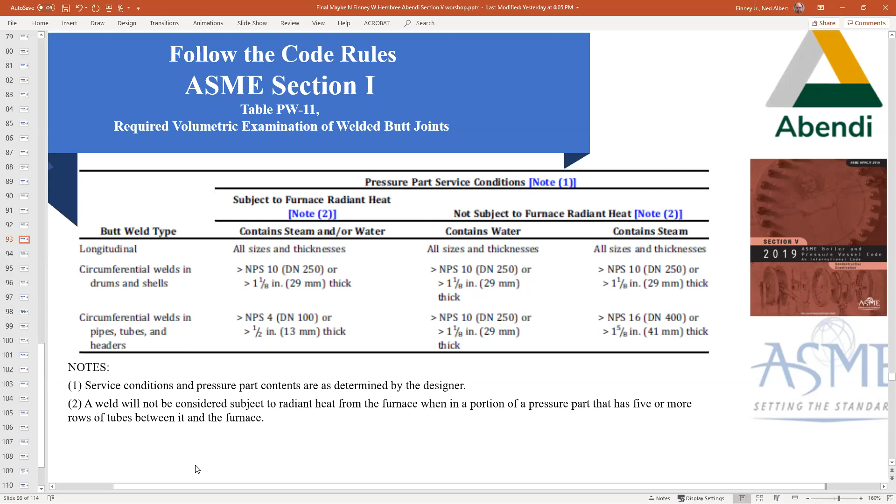This is an exception. Again, the code does make exceptions to the methodology we use. Where the thickness is below 1/2 an inch, radiography shall be used.

Both RT and UT examination are required for welds in ferritic materials using the electroslag welding process. If a grain refining austenization heat treatment is used, the UT examination shall be performed after the heat treatment is completed. And it goes on to say UT examination shall be done after an intermediate post-weld heat treatment or the final post-weld heat treatment is completed for alternating heat treatment when it's not used. So again, the construction code says when it's supposed to be done.

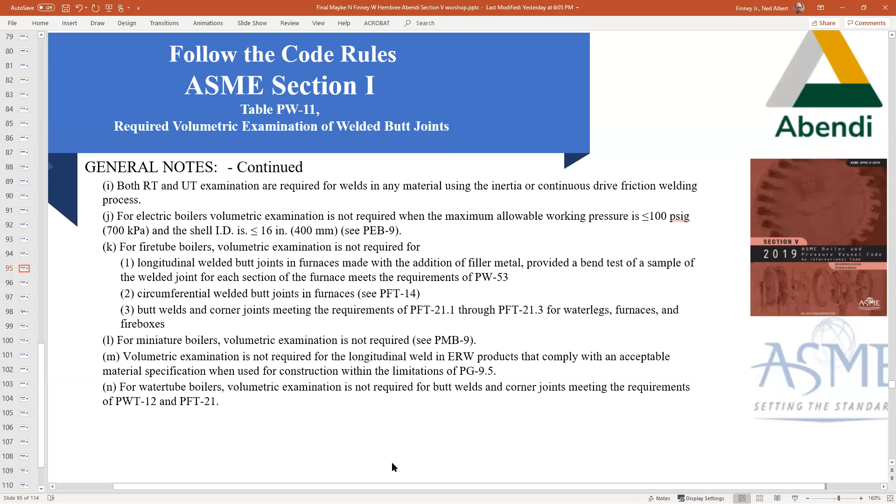Section 3, NCA 4252 personnel, 52.1, indoctrination training. And this is nuclear, by the way. Section 3 is nuclear new construction. So I've given an example of fossil for Section 1. Section 8 pressure vessels are very similar. Now I want to talk nuclear construction. Indoctrination, training, and qualification of personnel.

Alpha: Measures shall be established to assure that all personnel performing or managing activities affecting quality are indoctrinated and trained. Bravo: All non-destructive examination personnel shall be qualified in accordance with these paragraphs, NB for Class 1 material, NB, NC, ND, NE, NF, NG, 5521, and the 5000 series under the title examination of the applicable subsection.

And again, subsection NB is for Class 1, NC for Class 2, Class 3 materials, etc. So that information is contained in 5,000. NCA 4252.1, indoctrination again, measures—I've already read that one. 4253, program documentation, quality system manual.

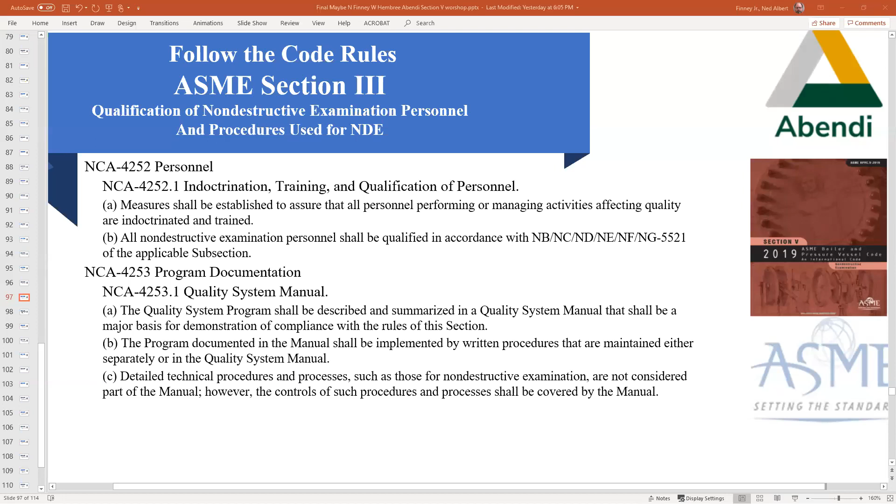Program documentation. Activities affecting quality shall be prescribed by and performed in accordance with documented instructions and procedures or drawings of a type appropriate to the circumstances. These documents shall include or reference appropriate acceptance criteria for determining that the prescribed activities have been satisfactorily completed.

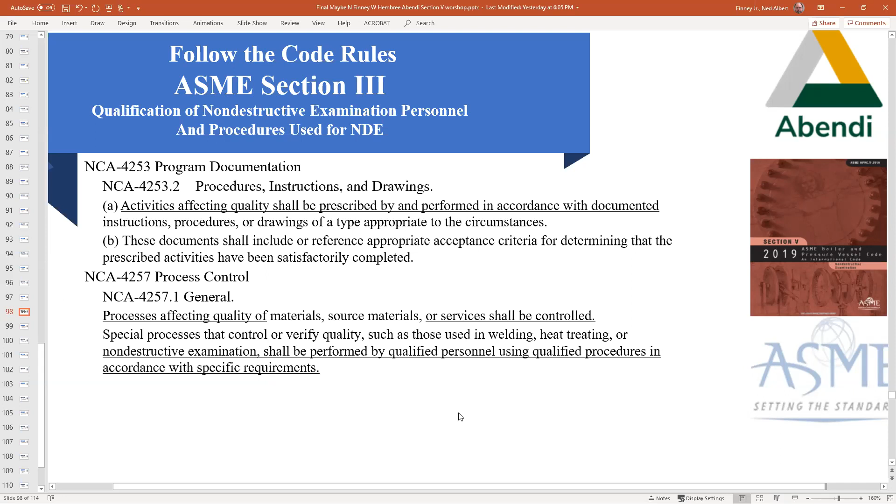The process control under 4257. Processes affecting quality of materials, source materials, or services shall be controlled. Special processes that control or verify quality, such as those used in welding, heat treating, or NDE, non-destructive examination, shall be performed by qualified personnel using qualified procedures in accordance with specific requirements.

Duties of the inspector. Again, this is not who's doing the examination, this is the inspector. The inspector who performs the detailed inspection in compliance with this section shall witness or otherwise verify all examinations and make all inspections required by this section.

The duties of the inspector shall not be interpreted by virtue of these rules to extend to any construction requirements beyond those of this section that may be set forth in the design specifications of NCA 3251 or on design drawings and construction specifications of NCA 3340. However, such requirements shall not result in construction that fails to conform with the requirements of this section.

NCA 5220, categories of inspector duties. The duties of the inspector shall include, but not necessarily be limited to, those given in A through M below, with E, echo, witnessing or verifying in-process fabrication, non-destructive examinations, and test. That's NCA 5270. That's the duties of the inspector. Go ahead.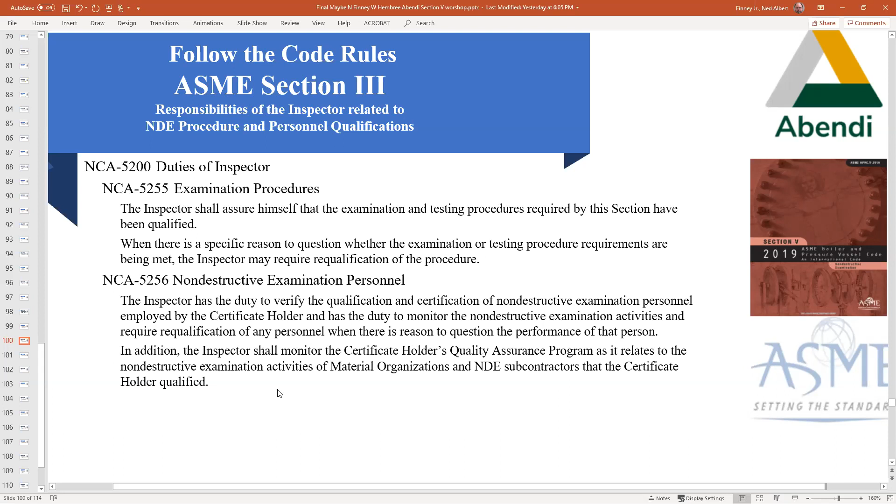In addition, the inspector shall monitor the certificate holder's quality assurance program as it relates to non-destructive examination activities of material organizations and NDE subcontractors, that I spoke about briefly earlier, that the certificate holder qualified. Again, it's the certificate holder's responsibility.

Continuing duties of the inspector, 5270: the inspector shall witness in-process fabrication, non-destructive examination, and destructive test when feasible. Alternatively, he or she shall check the examination and test records to determine the acceptability of the items involved. They do not have to make the determination; they just make sure that everything was accepted.

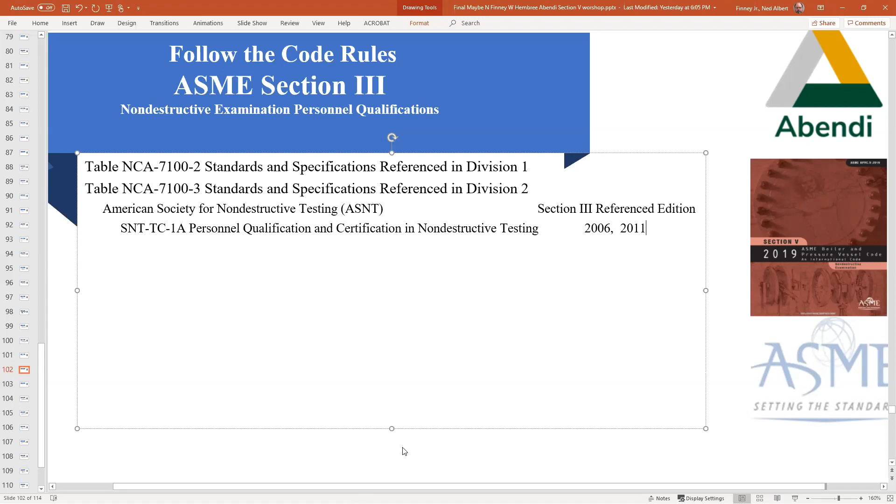NCA 7100-2, standard specification referenced in Division 1, 7100-3, referenced in Division 2, Section 3, Div 1 and Div 2. And then the other one, American Society for Non-destructive Testing, ASNT TC1A, personnel qualification and certification for non-destructive testing. And I missed the other line above it: Section 3 references 2006 and 2011 editions of TC1A.

Different methods, continuing on 5111. Again, all this is out of the main title. Think of that as NX 5000 — that's NB, NC, ND, etc. NB 5000 examination under 5111 methods.

Non-destructive examination shall be conducted in accordance with the examination methods of Section 5, except they may be modified by the requirements of this article.

Under fabrication, radiographic examination shall be performed in accordance with Section 5, Article 2, except that fluorescent screens are not permitted for film radiography. You can't use fluorescent screens.

The geometric unsharpness shall not exceed the limits of Article 2, Paragraph T 274.2, and the image quality indicators of Table NB 5111-1 shall be used in lieu of those in Section 5, Table T276.

Well, why'd they say that? Because our table is used by many, many different codes, and while it does not proclaim to achieve 2-2T sensitivity, neither does Table 5111-1. However, it is a little tighter on some of the different thickness ranges concerning radiographic sensitivity. The requirements for the retention of electronic and digital radiographic images are the same as that for film, analog.

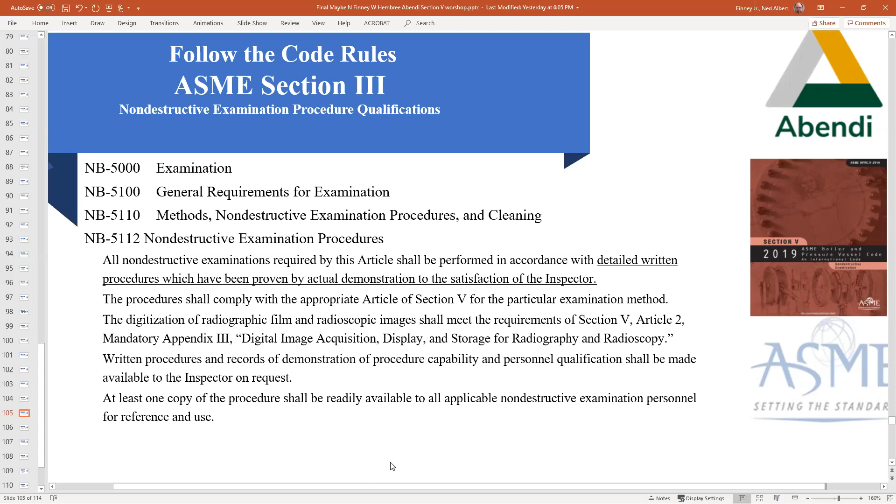Examination general requirements: organizations performing code-required NDE shall use personnel competent and knowledgeable to the degree specified in NB 5520. When these services are subcontracted by the certificate holder or quality system certificate holder, he or she shall verify the qualification of personnel to the requirements of NB 5520. All non-destructive examinations required by this subsection shall be performed by, and the results evaluated by, qualified non-destructive examination personnel.

5521, qualification procedure, alpha. Personnel performing non-destructive examinations shall be qualified in accordance with the recommended guidelines of SNT-TC-1A. The ACCP Level 2 and Level 3 provisions for qualification certification. The ASNT administered Level 2 certification provisions for qualification certification of NDE personnel shall not be used for Section 3.

The employer's written practice required by paragraph 5 of SNT-TC-1A shall identify the requirements relative to the recommended guidelines. The recommended guidelines of TC1A shall be considered as minimum requirements except as modified, 1 through 5 below.

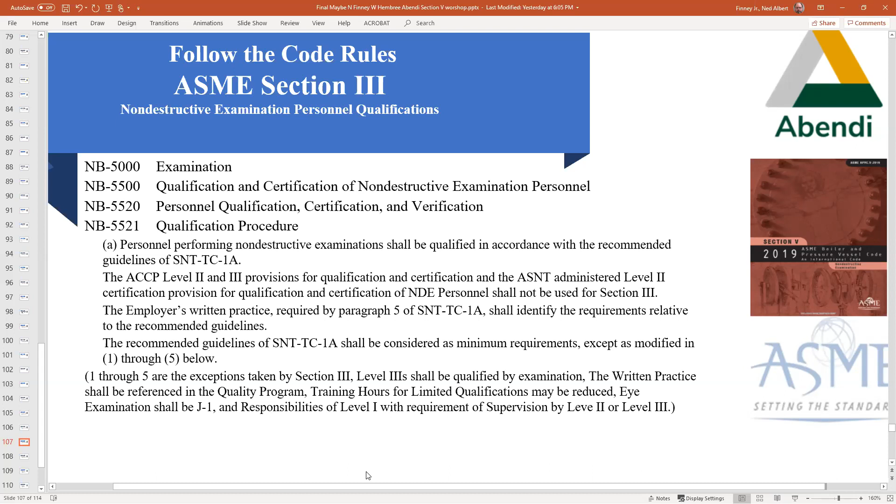The written practice shall be referenced in the quality program, and the level 3s shall be qualified by examination.

The employer retains responsibility for adequacy of the program and is responsible for certification of level 1, level 2, and level 3 NDE personnel, even when ASNT is the outside agency administering level 3 basic and method examinations. The employer may use a letter from ASNT as evidence on which to base certification.

When an outside agency is the examining agent for the level 3 qualification of the employer's personnel, the examination results shall be included with the employer's record.

Let me stop here. ASNT for level 3 gives you a 2-part of a 3-part examination. It's a written exam for all the NDE methods that they offer. ASNT at present doesn't give a performance exam, a practical exam. Again, that's up to the employer to satisfy.

But if someone has an ASNT certificate, for example, in radiography, and you want to hire them to review the radiographs, then it's your responsibility to complete the process and give them a practical exam that's pertinent to the type of work that you're doing. Just because they have an ASNT level 3 doesn't mean that they're qualified to review radiographs. Same thing for ultrasonics, if you will.

5523, back up a second. Verification on non-destructive examination personnel. Again, the certificate holder has responsibility to verify the qualification and the certification. The certification, ladies and gentlemen, is nothing more than the stroke of the pen, the piece of paper that says someone's qualified, for the non-destructive examination personnel employed by material organizations and qualified by them in accordance with NCA 3820.

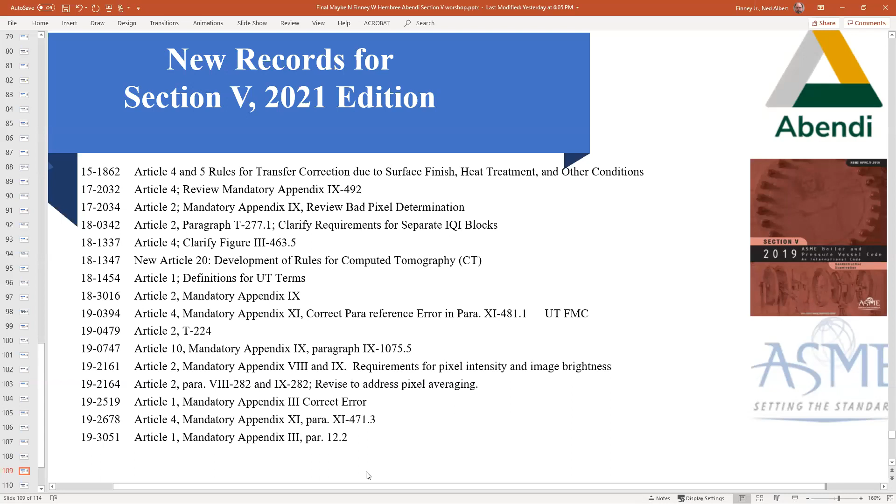But before you go on, go back to the other slide, computed tomography. This was necessitated by the advent of the code looking at additive manufacturing. This is one of the NDE methods that can be used for that. I lost my train of thought. The computer generated components, yeah, digitally printed or laser welded and all of that, where they build things by advanced manufacturing. Correct, that was it.

Continuing on, we also added new Article 21, which is the pulse eddy current examination. It's used primarily for some new applications, we'll talk about it in a minute.

Article 1, mandatory appendix 3, we had a complete rewrite. It's been approved, so it'll come out as well. We also plan to have a code case on it so that it can be used early. And then Article 1, mandatory appendix 1, Article 4, mandatory appendix, we did some more work there in the FMC.

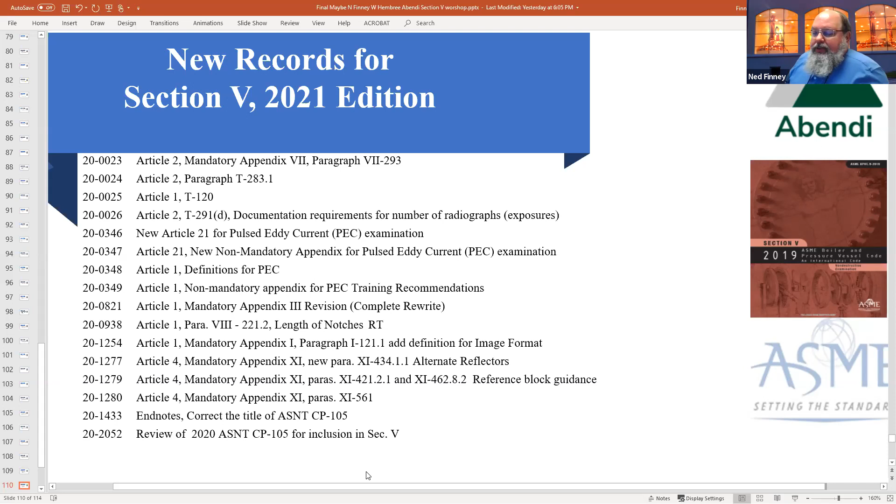The transfer correction, we've done both straight beam as well as correction for angle beam so that you can use your cal blocks that are a different heat treat, a different surface finish, a different thickness, those sort of things. Quite an effort here, and we were glad to get it approved, and we'll get it published in the 2021 edition.

Mandatory Appendix 3, Article 1, the use of SNT-TC-1A 2016. We've been through a lot on it. There were errors identified in publishing. There were some typographical errors. There were some references that were not correct that we fixed. A lot of work has gone into that.

Pulse eddy current is used primarily for examination of components for corrosion and or erosion mapping. It's going to come out, new rules for use of it.

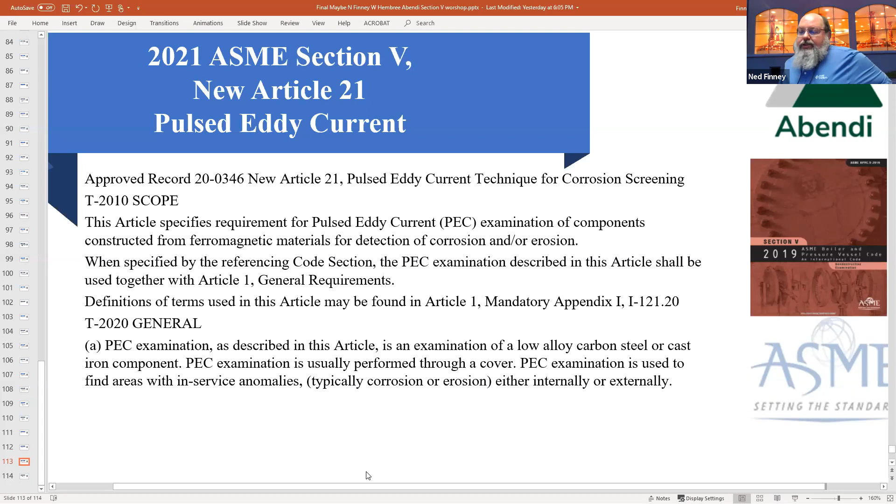And that would complete our presentation. I guess we're into questions, Antonio. Yes, and just in the perfect time. So sharp.

I have a lot of questions here, and let me begin with the first one. Why do some ASME authorized inspectors in Brazil not accept ISO 9712 certification?

ISO 9712, the 2012 edition, has been accepted for certain things, and we talked about that in the early beginnings there.

Okay, I was next going to see if I can get to that slide. Yeah, while he's trying to pull that slide up, I'll chime in.

Right now, we've got, I'm not going to call it a dilemma, but I understand what the ASME survey team leaders are going through trying to look at the many different NDE programs out there. You've got SNT TC1A, many different editions that many different codes use. We've got a spreadsheet, if we have time we'll bring that up to show you, for example, each section of the code.

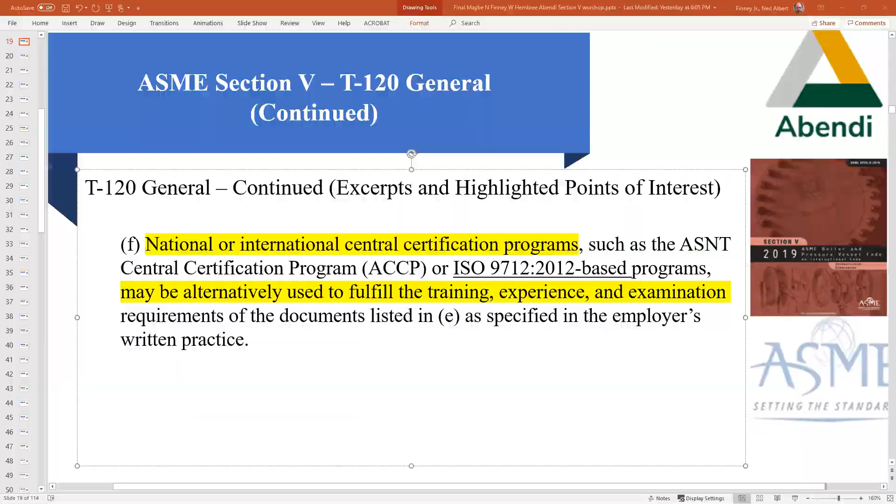The way it should take place is write a letter to the ASME staff secretary of that committee and let them know that you're interested in participating on committees. And they would reply, please fill out the attached information with a letter of support from your company. It would go before our executive committee. We would vote on it. The reason we do that is to look at it and make sure we have all the pertinent information.

And then, especially while we're still in Zoom, we're going to have Zoom meetings all next year. And the personnel would be voted in. They would be in the resource development group, and they could have a word on any open committee that's within Section 5. All the committees that we have are open to the public except for one, and that's our executive committee or admin committee, where we go over internal procedures and things of that nature.

Okay, thank you. The next question is, can a specimen for a level 3 test qualification, for example digital radiography, be used for qualification in another technique, for example TOFD, when referencing a procedure? So you've made a specimen for radiography and you want to use it for ultrasonics. That's right. I don't see any reason that you would not be able to do that. Now, that's my opinion, not that of the committees, but I don't see any reason that the specimen cannot be used. The one thing you have to be careful of, if you're doing a demonstration where only the supervising level 3 is supposed to have knowledge of what the flaws are, then you have to maintain confidentiality of what the flaws are in that particular specimen.

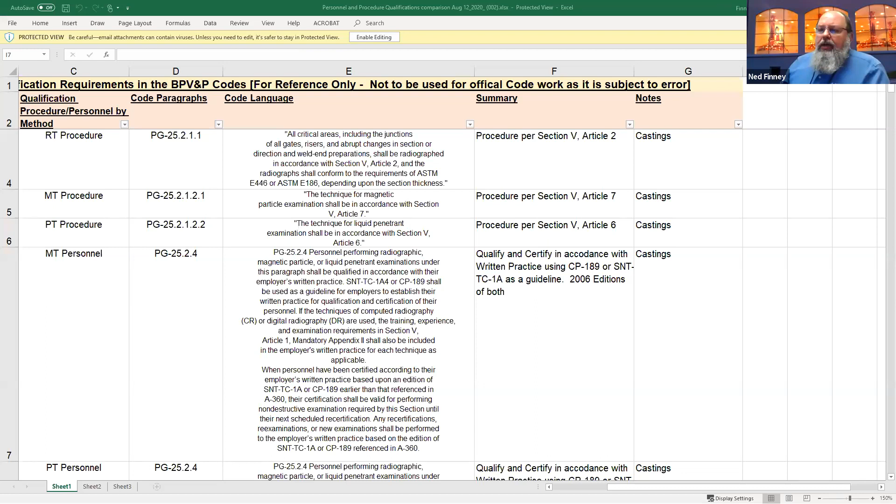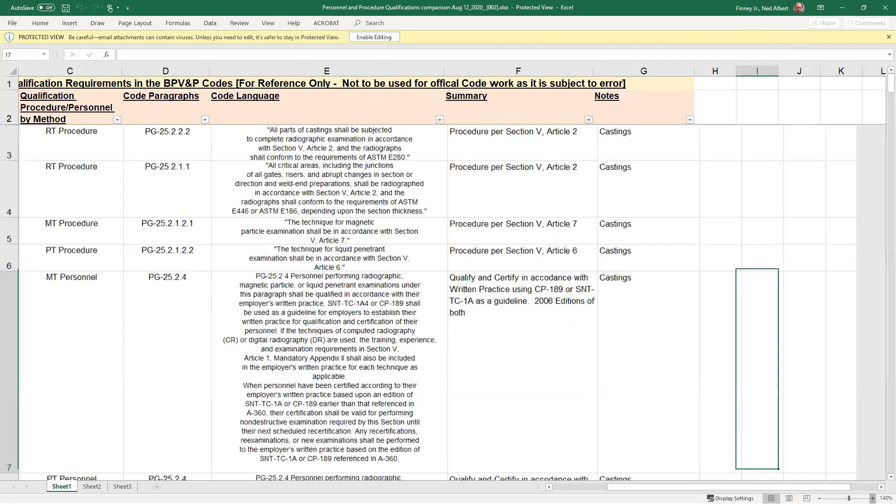Okay. Are you seeing my Excel spreadsheet? Yes. So this is a document that we did. Wonder if I scroll back. First. There you go. Reduce it a little bit if you can. There you go. That's a little harder to read, but that's okay. But you can see all the way across the top what we have. Go back to the left-hand side. So this is Section 1. Can you see that now?

Yes. Section 1 requirements for the procedure. This is the actual code text, and this is what it points to. And we've gone through and we have this document for Section 1, Section 3, the different divisions of Section 3, Section 4, 8, Division 1, Division 2, Division 3, 9, 10. So you had a question about 10. This is what Section 10 points to.

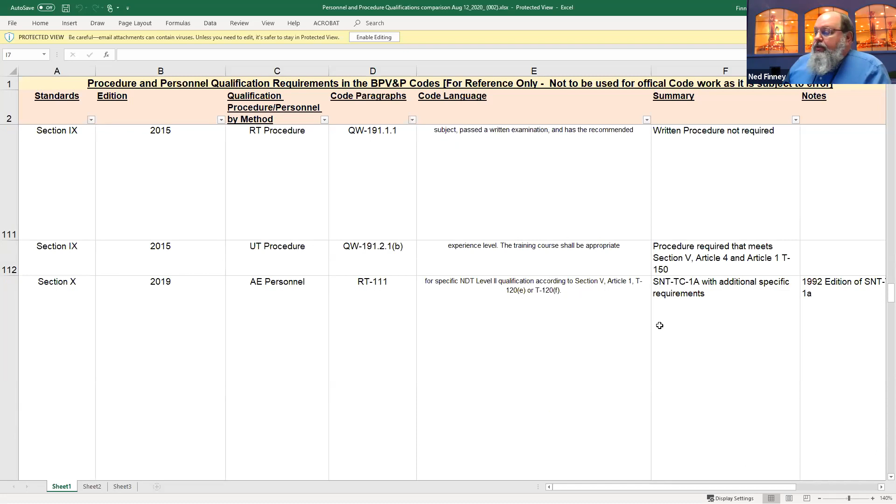As you can tell, they currently don't point a lot to Section 5. We've been trying to work with them on correcting that. Section 11, Section 12, B31, 31.3, 31.4, 5, 11, 12, 31Q.

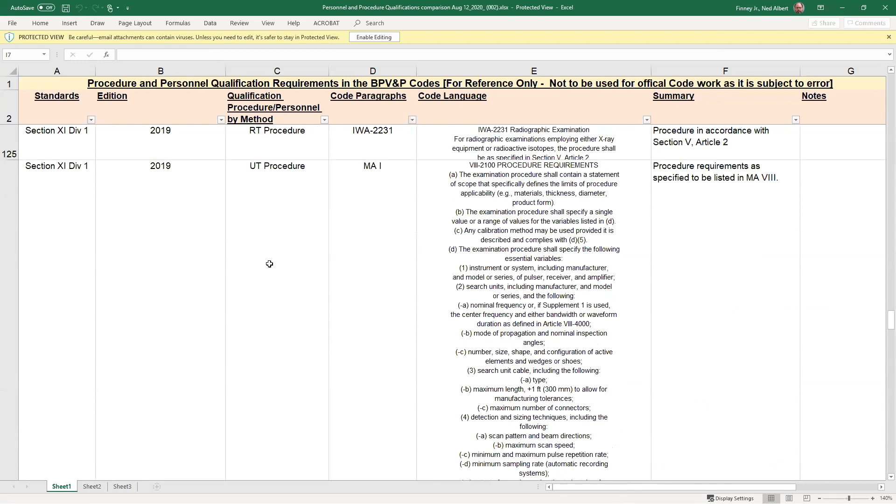A lot of work went into preparation of this. One of the members on Standards Committee 5, who happens to be chair of surface examination, put this together for the committee to know the variations within each code, how they reference Section 5 and how they reference NDE procedure qualification and personnel qualification. Correct. So it's quite a document. Obviously we could spend hours going through this with personnel, and maybe Chris wants to set up another opportunity for us to do that.